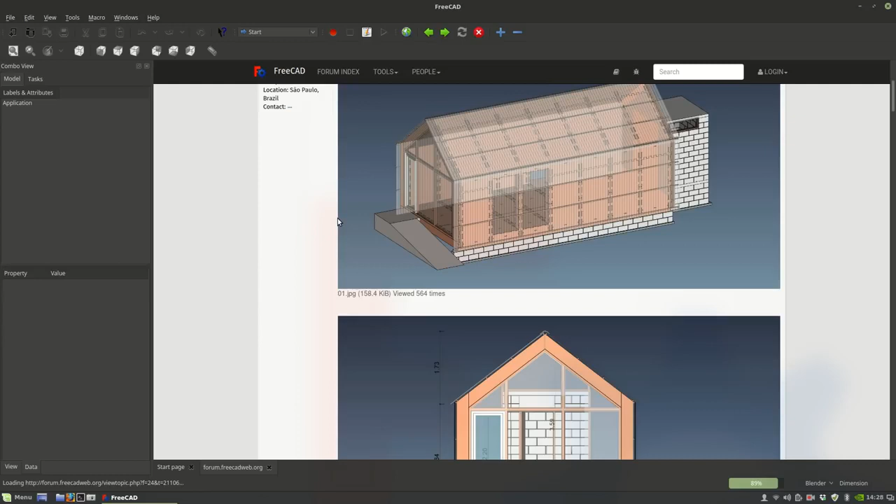For example, you can see all these new projects that Yorik has been working on, and you can actually engage in some kind of meaningful conversation with the community if you're a user. So it's very open and very accessible, and that's something I mostly enjoy about FreeCAD.

Anyways, you can go back and check those things out. The next thing I'd like to show you is that you can start your project if you had a previously saved project, or you have direct links to the tutorials, the FreeCAD homepage, and some example projects - this is an example project, the example architecture model.

This is basically a section cut and some elevations, one in wireframe mode and one in solid. So when you look closely, you can see the level of detail and the quality is there, and it does the job.

It does explain pretty much what's going on, and you can see the section here. It's pretty legible, pretty clean, as you can see. This is very basic, of course.

And then here you've got the model itself, which you can also observe and see how it was put together. So it's fairly good that it was made that way.

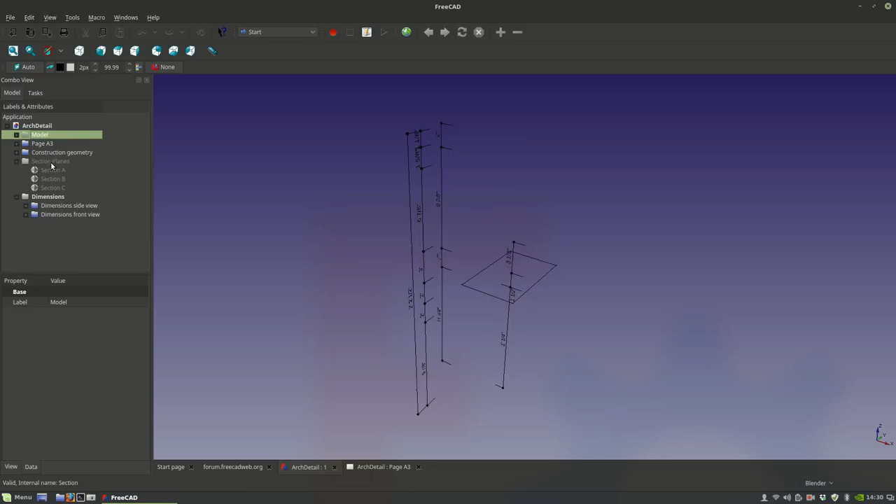And on the left here you've got the tree. So here you can see this is the folder where all the dimensions are. I can hide the dimensions like that, or hide the entire model if I want, or show the section planes, the section cuts that are cutting to provide these views.

So it's very organized. You can organize the drawing, and everything is simple and intuitive to work this way. So I'm just going to try to do a very basic demonstration at first, using some of these tools, just to see how it goes and how we can generate or create basic stuff in FreeCAD.

So I'm going to close this, and here I'm back in the start page. I'm going to start a new project by clicking on this button here. So you can see it started a new folder. Right now I have to select the workbench.

The four main workbenches that are probably going to be used the most would be the architecture workbench, primarily the one that would be used, and the draft workbench, which will also be used. Occasionally we can use the sketcher workbench - depending on the application, you can use it often or not, so it really depends. For this particular purpose we might not use it as much, and sometimes we might go into the part design workbench too. So those are the four main workbenches that could be used at any given time, but mostly we'll be hanging out in the architecture workbench.

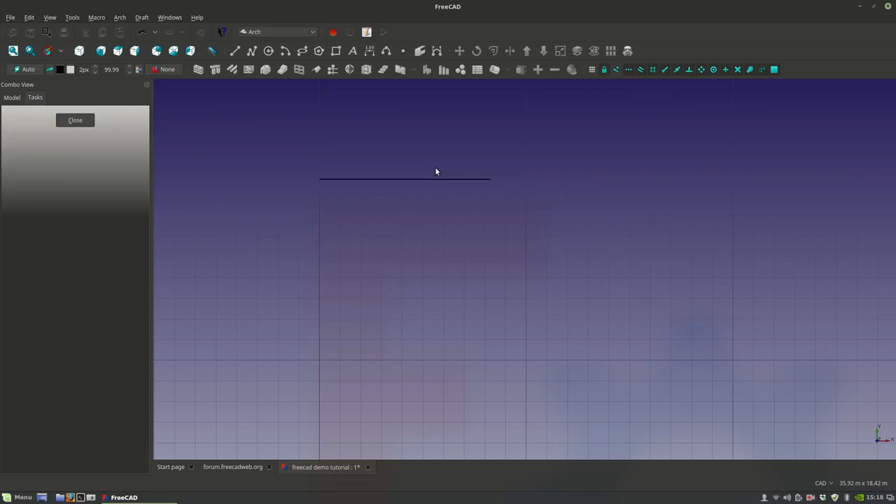I have this option here that says survey - start survey - and if I click on the line, it's going to tell me 8.19 meters. So that's one way I can figure it out. If I want to get out of that menu, I can double click outside of the object to deselect it, and then it's gonna go away.

So that's one way. Or the second way, I can select the line and come to the data property and see the length information here, 8.19. Equally, I can modify this length from here, from this menu.

I can say I want it to be 10 instead, and you can see it did update, so now I have a line that is 10 meters. That's very easy to control the length of any line anytime. So I select this line and I want it to be 20 meters, so I just enter 20 meters like this.

Each object that you draw has a name. So I'm gonna delete this one and look at it again. Here I can also control with every object the display mode, so I can go to point or wireframe—it's not gonna show us more because there's no difference between flat lines and wireframe for a line.

So I can tell it to be dashed or dotted, or dash dot, or change the line color. Or the line thickness, I can change that too. Like I said earlier, I like this option a lot, so I'm just gonna leave it to the default property where it was before.

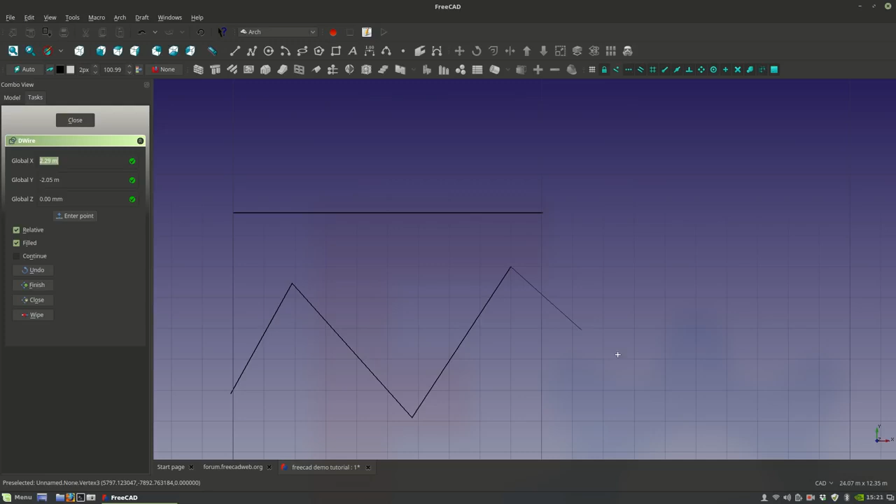The next thing I'm going to look at is the polyline—it's called the draft wire, or D-wire, in FreeCAD. I'm gonna click on it, and you can see I can click from one point to another, making a consistent connection of lines, and then click finish.

Here as well I have all the same controls, and more information as to how far I want to control this object. But what's particularly interesting about the D-wire is the chamfer size and the fillet radius. Let's look at the fillet radius—if I increase it...

Let's go to 0.1—you can see how it gave this a radius of 0.1 meters. I'm gonna go to 2, 5, and so on. You see how it gave everything a radius. That's the fillet radius, and it's very smooth. This allows us to create simple shapes with nice smooth rounded curves that are always parametric, because you can always increase that as needed. Pretty cool, I think.

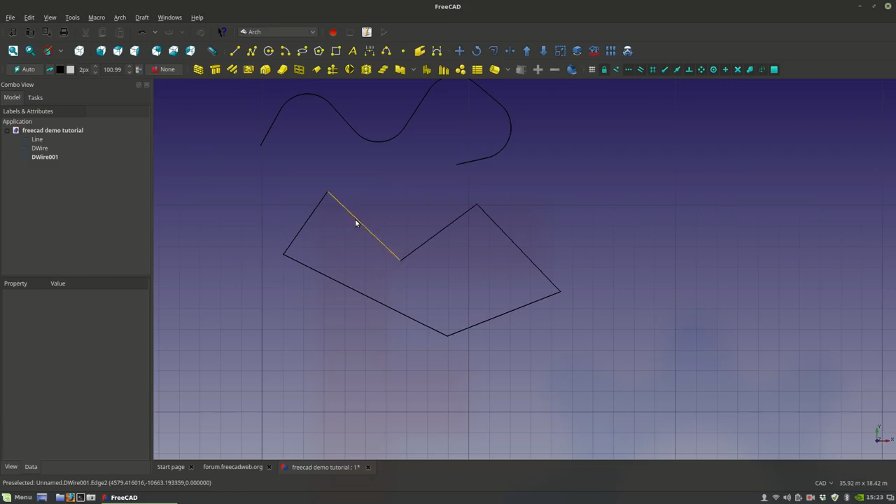The other thing is, if I draw another one as an example, I can close it like that. If I close it, it creates a face. And in that face, I can have it in two modes: make face mode true, or make face mode false, in which case it goes to the wire, giving me the ability to play with it as a wire instead.

And just like this other mode, you have the ability to control the fillet radius—you can see everything is being rounded. Alright, so it's looking good, like that. It's starting to look like a fancy table from the top view, you know. Pretty cool.

Then for face mode, I can control the opacity value. Under view there's the transparency setting, so I can set it maybe to 80, and you can see that it gives this kind of opacity feel to it. This is very good for designing plans and 2D furniture and stuff like that. And obviously you have the other options like the line—you can always control the length of the line at any time, and this is very perfect.

I want it to be 1.5 meters.

Okay, so there you go. It's perfect. Of course, you've got all the properties that you can play around with.

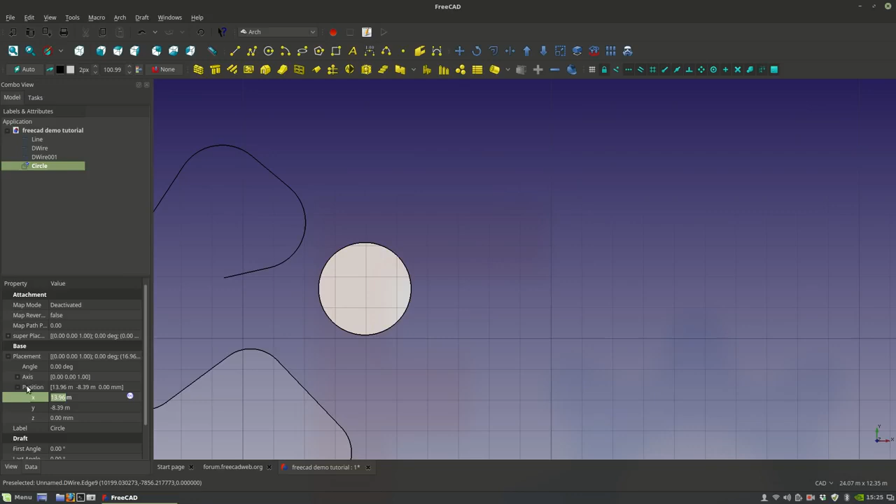Likewise, the axis controls the angle and the direction, the degree. I can tell you more about that later when we have a need to use it. Alright, so here's what I can tell it to be true or false, as you can see. Alright, true.

And of course, here we have the arc tool. So I'm going to draw a line, and then I'm going to start from here and draw like this. This is a tool that we use a lot to create doors with. You see, it's very perfect to create a door.

So if I want to create a door, I'm just going to draw one line like this, and then another line like this, and then I'm going to stretch this down with this tool, the trim, and then snap right here, and you can see that I already have a door. So I can try again on the other side like this, and then I click right here, or I go in this direction, and that's how I have my arc.

And likewise, this is very easy to control. You've got the radius property as well that you can always control.

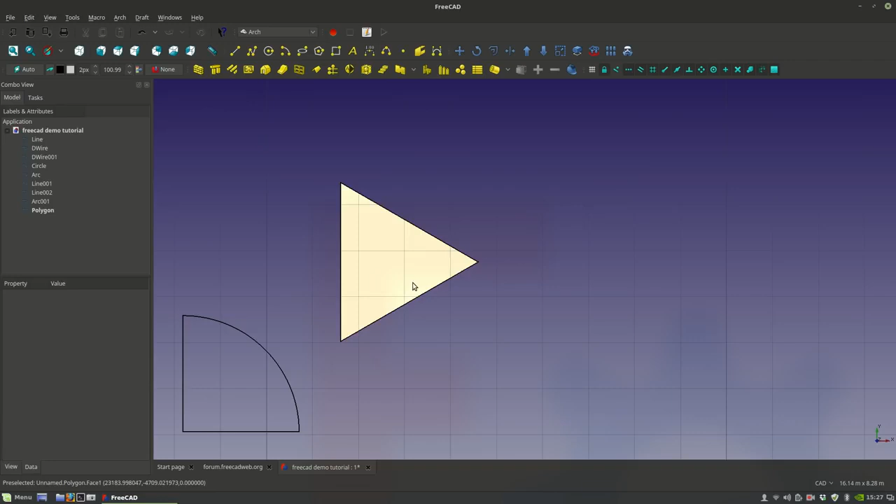And here you have the polygon. Right now it's set to 3, so it's a triangle. This is perfect for creating triangles. Or I can increase the number of faces at any time as well, and it gives me different geometric shapes that I want.

This is pretty cool, and I can control once again the size and more information.

Alright, and obviously we have the square. The square is amazing, and we will be using it all the time. It's straightforward, and also you can control it at any time. So here I just drew a box, and I didn't take care of making sure it snapped right. So I just select it again, and I make it 3 by 3.

And obviously if you take the survey tool, you can check the area by clicking on the face or the edges length. Okay, so there you go.

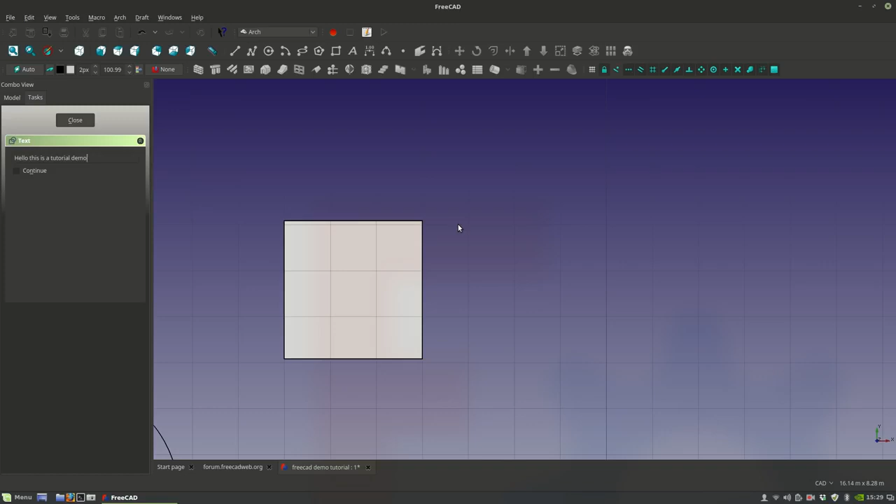Now then you have the text tool, annotation tool it's called. To use that, I just click in space, and then I enter what I want to enter: 'Hello, this is a tutorial demo.' Then I press enter one time and enter the second time, and it gets the text in. As you can see, I have the text that appeared there, and I'm going to select that text.

Come to the view and then increase the size with the font size. I can just scroll, and you can see how it's going to increase. Okay, and maybe I want to make it 200, right? I can make it right center or right justified. Some basic settings.

The line spacing if you had more lines, the rotation, the axis, and then the color as well. You can change the color if you want to, of course, just like any other thing in FreeCAD. And here you've got the font name. You can change the font. Maybe I want to work only with Ubuntu font like this, or I want to work with Arial like this.

So any font that is stored in your file system is going to be captured by this font name area. This is how you control the font. So this is looking good.

What else? And then you obviously have the dimension tool, this guy. Let's click on him. I want to dimension from this point to this point. So I'm going to click on that point, and I'm going to click on that point, and I'll drag my dimension, and there you go. I have a nice looking dimension there.

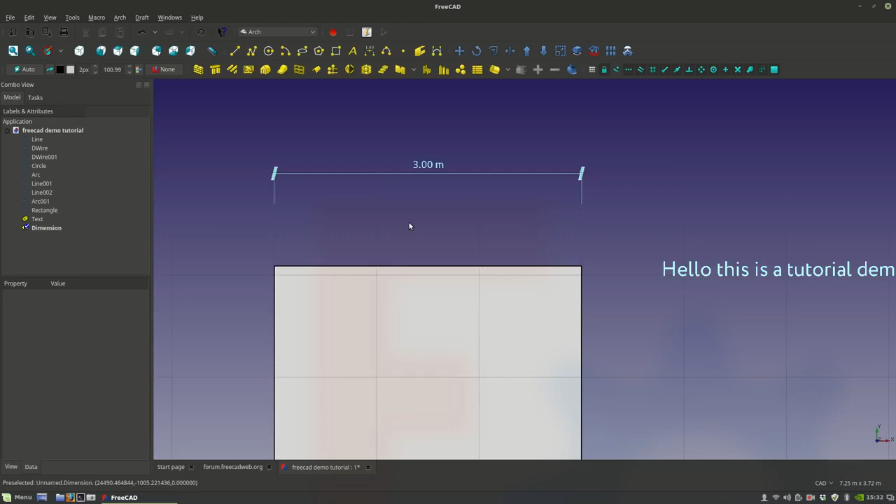I can tell it to show the unit or not show the unit in this particular case. And this is the offset value from the line to the edge. So some basic control, just like any other CAD program, you're going to have this basic control, and obviously the position and the distance and all the information you need to know. So that's that for those tools.

These other tools are not going to be used quite often, but there are occasional times where we're going to use them, and I'll tell you when I use them the most. But for this general purpose, this is already good enough for what we're trying to do. So I'm going to select all of that, hold and drag up, select all of it, right click, and delete, and I have a clean slate again. Alright, let me take a quick break and I'll be right back.

Alright, welcome back. For the next part of this adventure, I thought it would be interesting to start from a project that I am familiar with because I did it myself, and I can easily talk about it. So this is the kind of layout or result in terms of project that we will be trying to replicate.

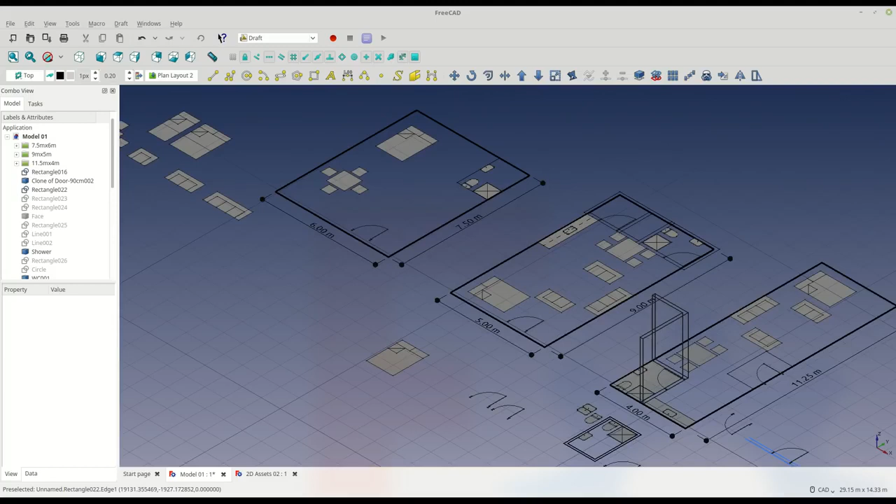And this is the trick about how we model in FreeCAD, understanding how to be efficient with it. Because when you're modeling in some of these 3D applications, it's very hard to understand how to make quick changes and figure out quick layouts and move fast. We all want to jump into the 3D and all that stuff, but usually you have to figure out the first basis for a lot of things, which is the floor plan. How does it work in the floor plan? Everything needs to first make sense floor plan wise before you can start to talk about the 3D.

This was a challenge in a way because I had never really created this kind of workflow before, so this was the first time for me to do something like this. It's very easy to work with a program like Revit or some of these currently existing programs, because you can just drag the walls, and AutoCAD has all these features where you can trim and move things up and down. In Revit, you can just drag the walls and play with the dimensions, but in FreeCAD it's a whole different way of thinking. Trying to understand how to play around with it was quite a challenge, and I think this was a good project.

So right now I'm just swiping through to show you a little bit how I figured out the layout, and I'm going to take you into the process of building this kind of stuff. It's not anything complicated, it's just understanding what you're trying to do and knowing how to do it.

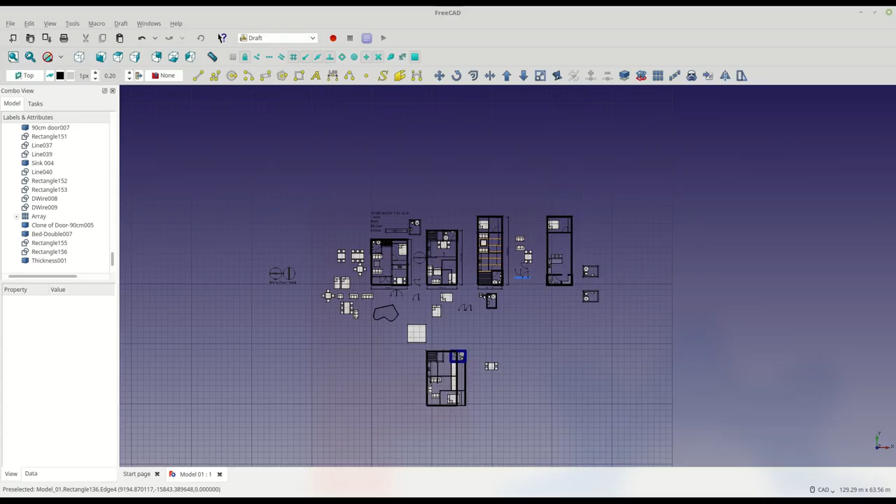So I'm just going to quickly swipe through, and sometimes I like to take pictures of what it looks like. It has this artistic appeal to it. Some of the line weights look very interesting when you look at it from afar. It has its own language, its own feel, and there's something very good about FreeCAD. It has its own identity. It doesn't try to look like the other programs.

So this is when I had figured out one potential working floor plan already. I'll kind of get down to it and explain to you.

So I'm trying to figure out the second floor plan, and everything looks messy. You see, I'm trying to figure out things, trying to build out this area, trying to understand how it works, trying to break down a few things, understanding the sense of what you're trying to create in FreeCAD, and then hitting your head against the wall until you get some kind of workflow that allows you to generate a consistent way of thinking. Eventually it starts to make more sense. You begin to have interesting shapes come out and reveal itself, and you can work with that.

Okay, so we're going to try to see how we can get to this kind of result, this kind of floor plan layout, so this kind of way of working in 2D.

All right, I thought that this was interesting. Looks like a face—this is the guy's chin and all that. This kind of futuristic, abstract, humanoid face. Anyways, so...

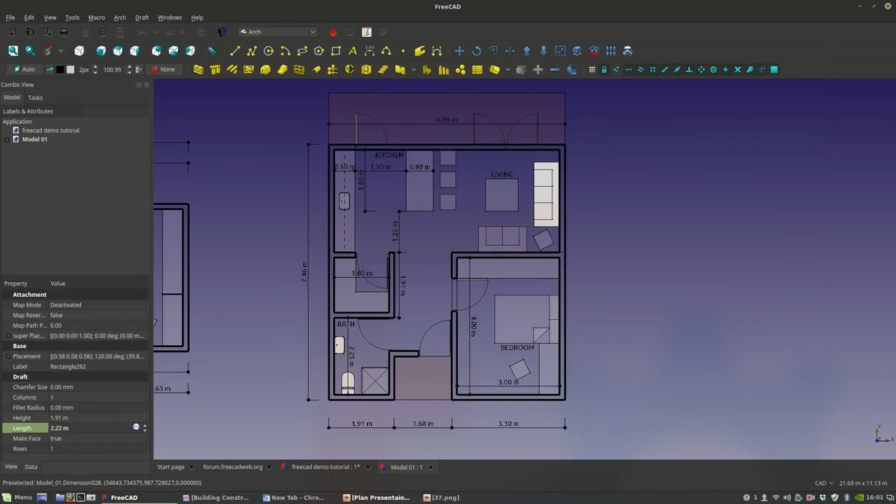So let's hypothetically say that you wanted to work with a 45 square meter space, and you had, let's say, a one bed, one living, one kitchen, one bath requirement to fit in that tiny space, and you were to start with some confined spaces. If you were to start with a confined space, what would it look like? And you have no idea what it would look like.

So the first thing you would do is you get into FreeCAD and draw the space itself. So I'm going to draw a box—this is my box, this is the basic box, the rectangle. Here I have the dimensions of the rectangle. And 45 square meters is, obviously, 6 meters by 7.5 meters. So I'm going to take my box and type the height, 6 meters by 7.5 meters. So this is my box right here, this is the size of just one of the sizes I'm working with. This is how I know what I have as a space to work with.

Okay, now I'm going to tell it to make face false, because I just want to see the guidelines. I just want to see the internal space, 45 square meters internally.

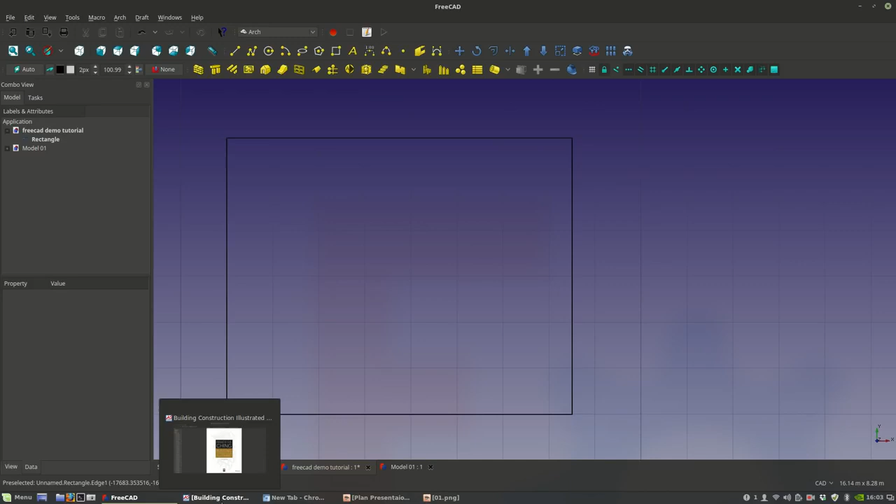Okay, so the next thing I want to do is get an idea of some of what I'll call assets, objects, a few things. For example, I want to know what my corridor width is, things like that. So a good example would be where I'm going to refer to D.K. Ching, where I'm going to look for the door width, or a corridor, the dimensions of a human being. Architects already know these things—I already know it, but I want to show you how you can get to this kind of information, how you can figure out something good to work with if you have no idea what you're working with. So instead of coming here, I'm going to go to the website and type in human dimensions.

I'm going to go to image and look at a few things here that tell me the dimensions, assuming they're more or less accurate for what I'm trying to do. This is why I use this book, but not everyone has the notion of using that book. So we have to find some good information, something that gives you information on height, length, width, sizes. I'm going to look for it and get back to you.

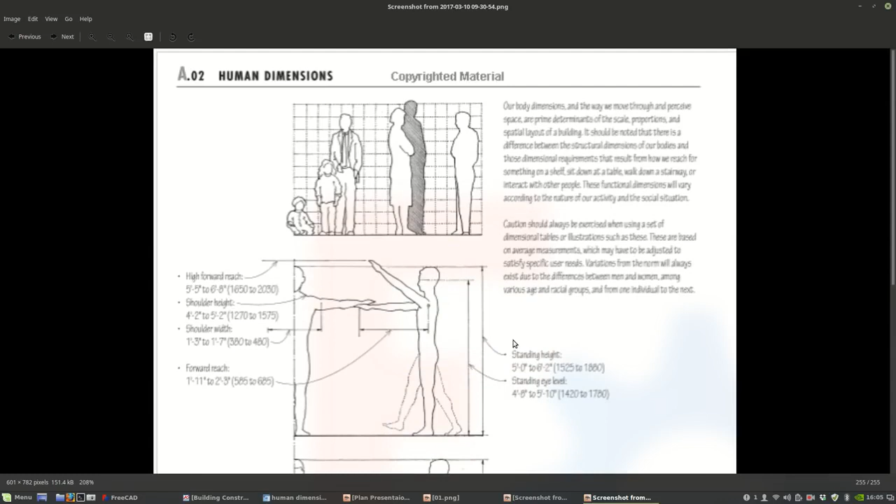So I brought up the picture of what we're looking for in the book, D.K. Ching. This is a bit what we're looking for, human dimensions, and this gives us an idea, though it's a bit blurry. Let me...

Okay, we're gonna use the picture I found. A human dimension is 5 feet by 6.5 inches max, or 1.5 meters by 1.8 meters approximately. So we can say that a sensible height will be 2 meters, since we work in meters, or a general standard height of walls these days is 3 meters.

And then you want to know things like this: if a human is standing sideways, they're 2 feet 2 inches of minimal space needed for comfort, or if standing frontwise, it's 3 feet 10 inches, or 1.17 meters.

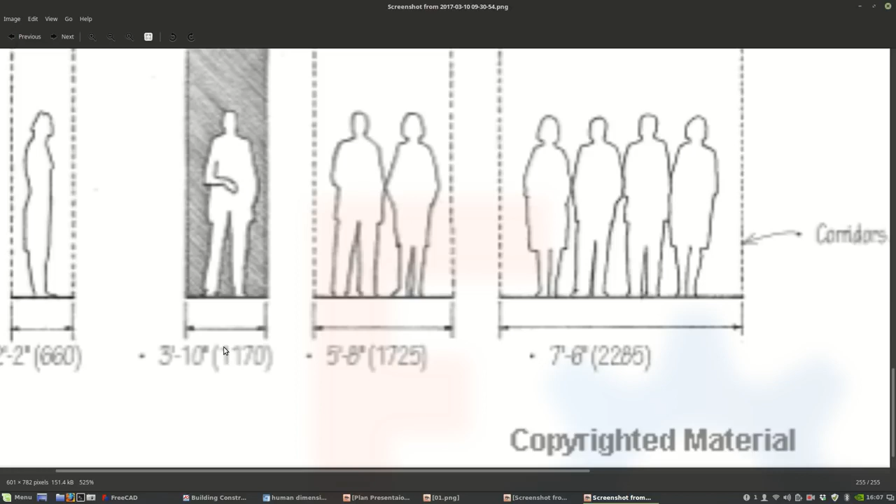So this is why the standard for corridors in the US is 4 feet. Anything less than 4 feet sometimes does not meet code requirements for corridors. In meters, that's 1.2 meters. We want to take that reference into account when working in FreeCAD.

So we want a box that's going to be, let's say, 1.2 meters wide by 1.2 meters. That's gonna help guide us with whatever relates to the corridor space we need in terms of circulation.

And then what else? This just tells you what 2 people look like, and 3 people, and what sitting looks like, seats look like. Here you'll also have some seating position dimensions, like 39 inches, so 0.99 meters, by 80 to 84 inches for the height.

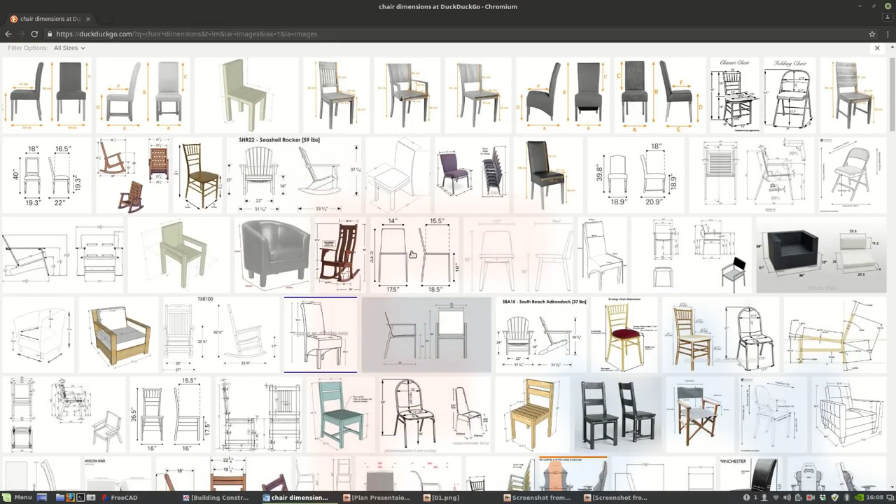So this gives you some general basic plan dimensions you can work with that are already standard. If you want to find those, you can just type in chair dimensions, and you can say, well, I want to know what the dimensions of a chair are. We want to look for it in meters because this is in inches.

Let's look for a good one. This is a sofa, 56 centimeters by 56 centimeters for this little stool, and for the chair itself it's 40 centimeters by 77 centimeters. All right, so now we know that.

So I'm just gonna take this box and duplicate it. I'm gonna check move and then copy, and move one copy to the side, and this is going to be my chair. So I'm going to make it 40 centimeters by 77. I'm gonna type in 40 cm.

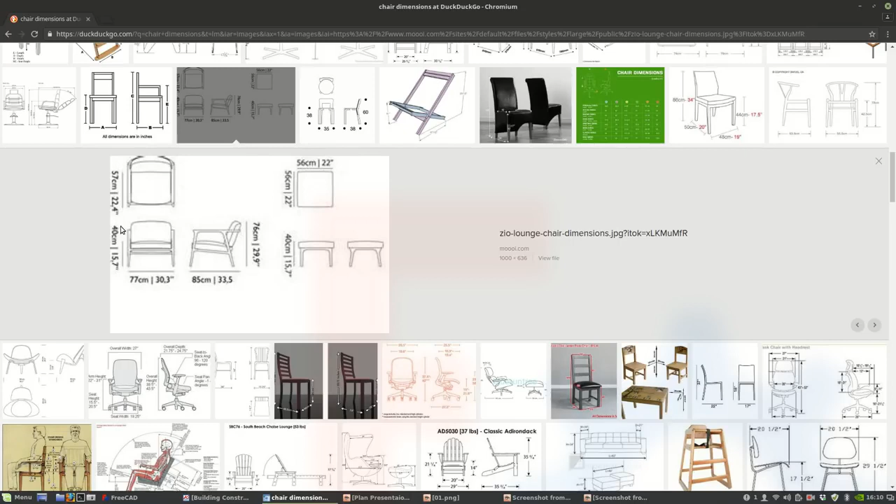And I'm gonna type in 77 cm, like so. Looks like a very interesting tiny chair. So what was the other one? The stool itself. Well, that chair doesn't make quite sense, it's a bit tiny in a way, 77 centimeters by 40 centimeters. That's too small. I want a better looking chair in terms of dimensions.

Well, I'm just going to go with this picture, it's gonna be easier since I already have it. So for the sofa, I have for an armchair, 0.565 meters. So I'm gonna type in here 565 and 56. Okay, that looks good, that's my chair. And the next thing is...

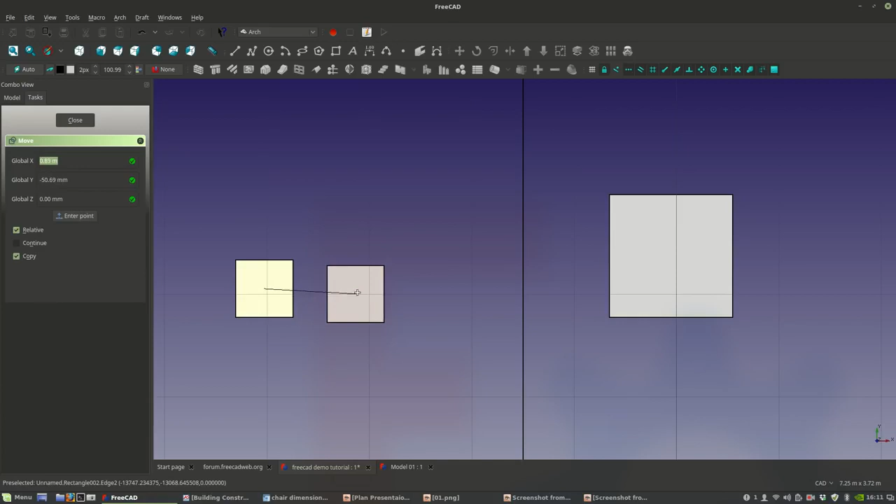Maybe I want to draw this. I'm gonna draw a box, 48, or maybe I want to make it 1.2 meters, right? So I'm gonna take that and duplicate it, copy it, and in this one I'm gonna make it 1.2 meters. He says the max is 2.845, so let's actually try 2.8. All right, oops, that's not right.

Well, I guess that's right, but we're going to go for a smaller dimension. So this is my armchair dimension, it's 0.585. Okay, so I have my 0.585 here, 0.58, like that.

Alright, so we're going to draw the 2D representation. It has this very tiny edge to it. So I'm going to come into FreeCAD, take this line, make it false in terms of face, then select the line again and take the offset tool, and offset it by something that looks approximately accurate.

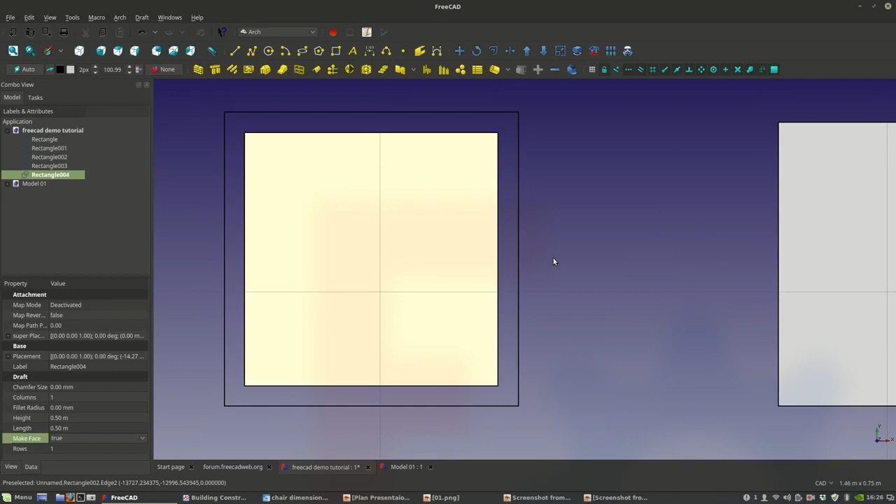So I'm going to take that guy again and make it false as well, so I can see what's going on. So I'm going to take the polyline tool, like this, and click right here, right here, and so on all the edges.

And then here I'm going to snap onto the extension, but I'm going to turn off... well, I'm going to click here, then click here, click here, and then click here. Then here I can take this and go back - I can either double click here and it opens the menu where I can grab this and snap it right there and finish that, and there you go.

And then what else are we missing? Probably 2 lines towards the back, and I can just draw a box, maybe start from here and snap it right there. Take that box and I can see that the height of it is 50, and the width and length is 25, so I want it to be 10.

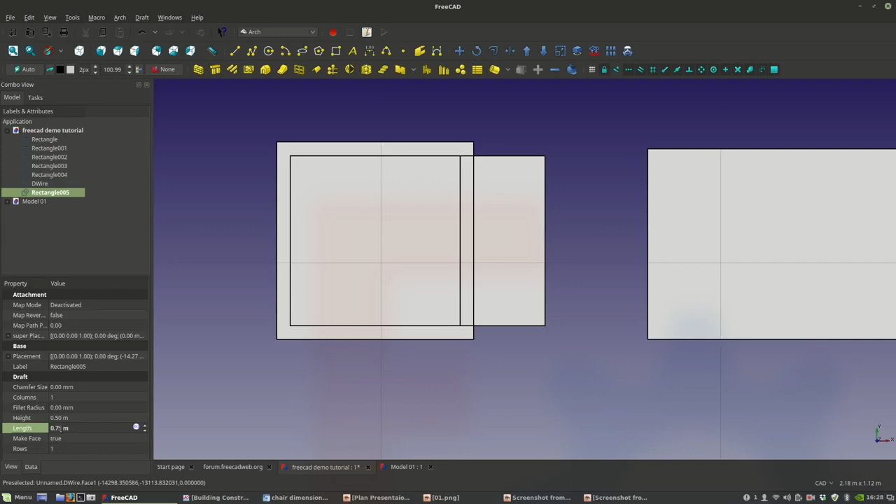And well, maybe I want to make it a little bit smaller than that, maybe 75. Okay, hold on, just delete that. Snap right there. Then I'm going to take this guy and 07. Okay.

And so I'm going to copy that, copy like this. Alright, and lastly I'm going to probably draw a line here like this, or yeah, and then I'm going to take another box and do this.

Okay, so now I can delete that line, and now these two rectangles that I initially started with, I can just move them on the side. I don't want to copy, so I uncheck this and grab them from anywhere and just move them onto the side like so. And so now I have all the shapes that constitute the sofa that we just saw there.

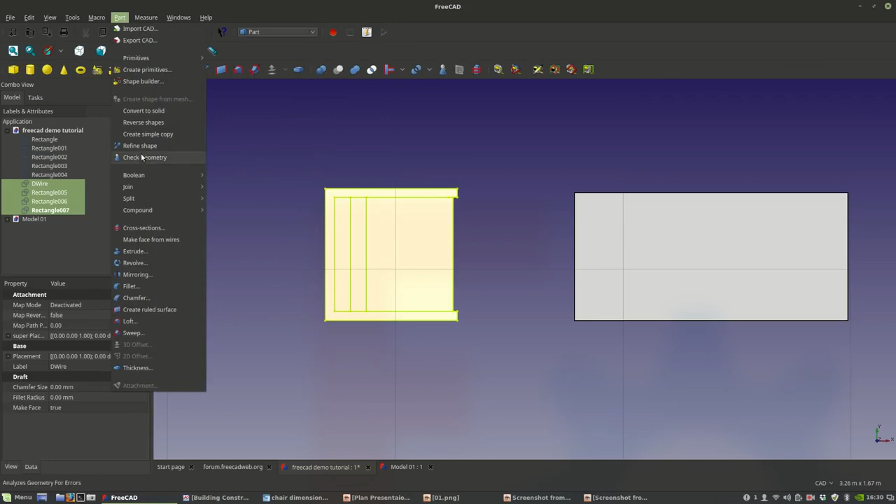So now what I'm going to do is select all of them like this, select all, and go to the part design, come to the part, and create a compound, make a compound. So now I have one object. You can see that object has a tree now which relates to all of them, and I can rename that compound - I will rename it armchair, armchair, like this.

And so if I were to make a copy of it, I'm going to go back to the architecture workbench and make a copy of it - right click here, and then copy. So the second armchair loses all of the link that the first one had, so now I can move this independently. So now I'm going to select this one and also come to the transparency value and make it 80. And so this is how I have my furniture. I can also select it and come here and change the line width, make it 1, and this is how I have my furniture.

Okay, so that's for my furniture. I can make a copy of him again and move him around here as one of my objects. Now I want to create the sofa, maybe a 3-seat sofa. So to create a 3 sofa, I'm going to base myself from one of these sketches again.

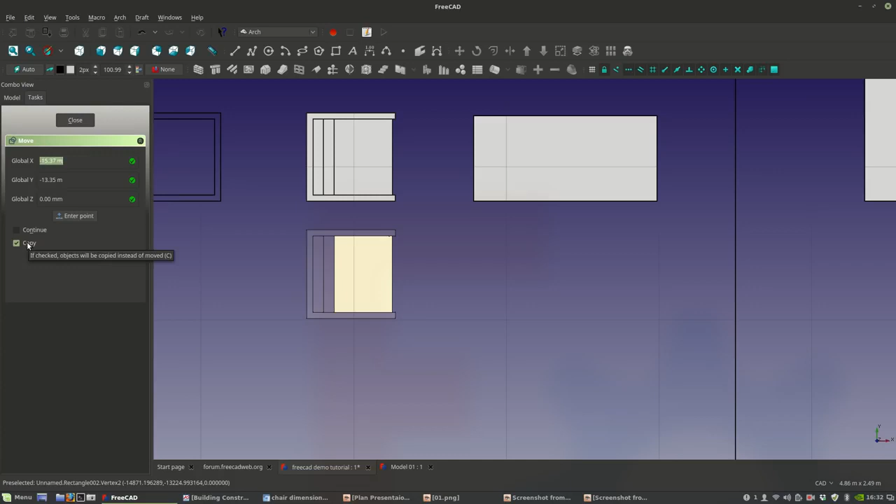So I want all these internal dimensions to be the same. So what I'm going to simply do is select this and move it, copy - or maybe not. I'm going to select this edge and then snap it at this other internal edge, so that it gives me this internal space divided by one line in the middle, and then this internal space. And then I'm going to do the same thing and make another copy, this time copy, so I'm going to snap from here to right here.

Alright, I'm going to take this line, get in there, and hide these others. I'm pressing space bar to show them. I'm going to select this one, double click on it, and drag this line and stretch it, as you see, like this.

Right now I'm trying to snap on this edge, but it's not snapping there, so I'm going to turn off a few snaps that are probably responsible for that. I have this extension that keeps popping up, I don't want it to show. I have this equal thing, don't want it either. And then this perpendicular - or is it the plus? This is the ortho, I don't want it to show up.

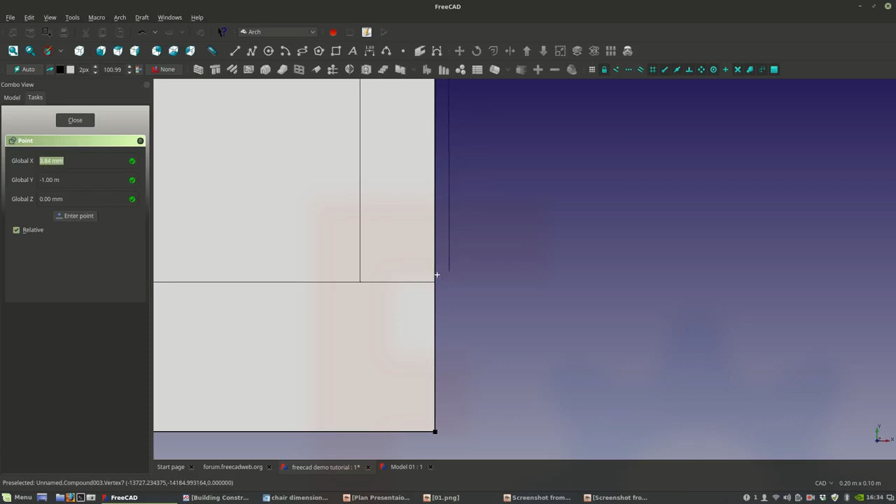Probably it's not snapping because this line is a face, so I'm going to change it to wire, make face false. Alright, so now it's probably going to be much easier to snap.

So I'm going to double click on it again, select that and snap it there like this, and then select that and snap it there like that. Okay, and then finish. I can make it a face again, true.

Alright, so these internal objects, I can hide them for now and then bring back the hidden objects later. This one I can double click, or maybe before that I want to create the dividers. So I'm going to select the line tool, click on this edge and then another edge, and draw that line.

I can hide this so you can see the line, and take this line and make a copy of it. Click here, copy, and then click from this edge onto this other line, so I have a nice division of 3. Now I can bring back these other objects.

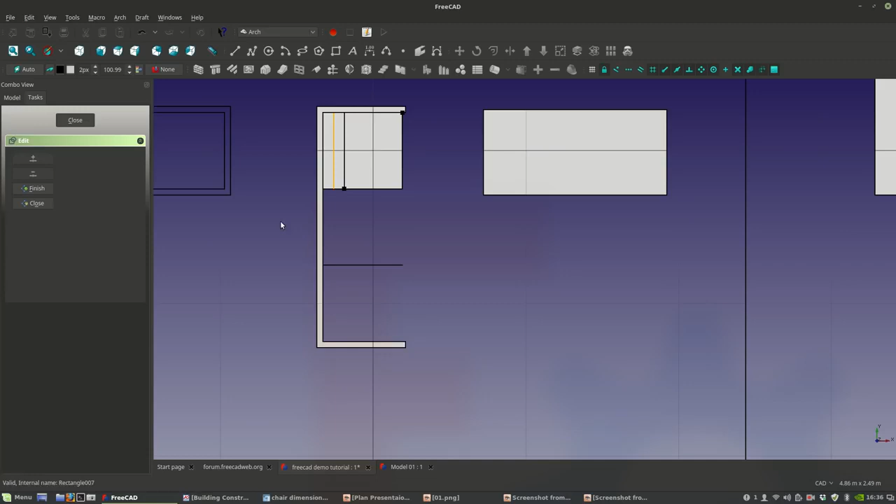I can double click on here, now take my box and stretch it all the way down like this, and it moves the upper end. I take the upper end and stretch it back till it snaps there again, like so, and then I say finish.

I do the same thing for this one - modify it, just stretch it down like so, and then like so, and finish. Then this one, do the same thing, like so and like so. Okay, so there you have it.

I have my armchair, so now I can turn these sub objects off like this, and turn on this object because it updated the armchair.

What I'm going to do now is make a copy of this armchair and call it something else. So I'm going to select this armchair and then select the two lines that I drew along with it, this line and this line, and then make a copy.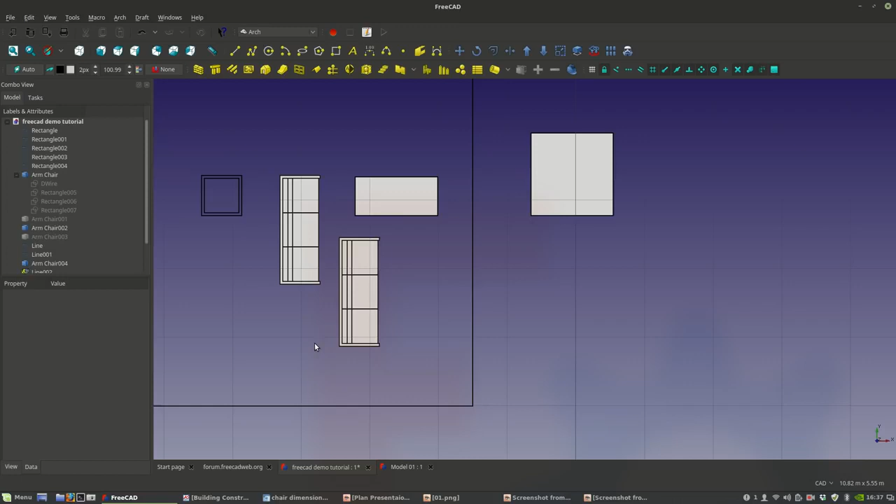Alright, so now the armchair is one unit. So what I want to do is rename it. Well, what I want to do first is combine all of them into one object like this.

I'm going to go back to the part workbench and make a compound. Okay, so I have a compound now, and I just want to break the link of that compound so I have one object. So I'm going to first rename the compound object. I'm going to rename it sofa, like that.

Okay, and then I'm going to copy that onto the side again one more time, and here I have a nice clean sofa that is just one object. I can also change the transparency to 80% and probably the line width to 1, and there you have it.

I can move that sofa right next to it, and this time I don't want to copy it. So now I have a sofa. I can get rid of all of these other objects that I used to draw, just edit box selection... undo that.

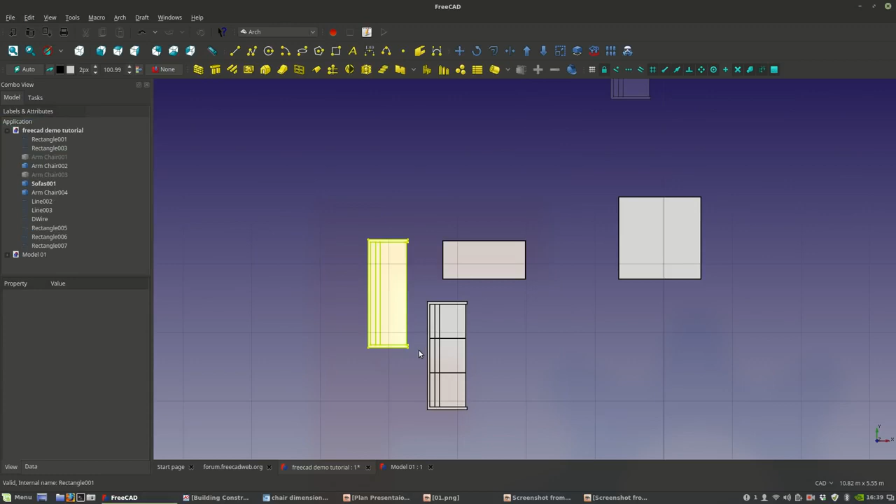Delete, delete, delete, and delete that. Okay, so you see how we've created a nice object.

It's called sofa here. We can rename it again. Okay, sofa, and this is going to be armchair. We seem to have another armchair there and another one here, so we want to delete those two as well.

Alright, so now we have a nice armchair that we can start to use, and we can save this and always reuse it all the time. So this is an asset that you can always reuse. So that's it, I'm gonna take a short break real quick.

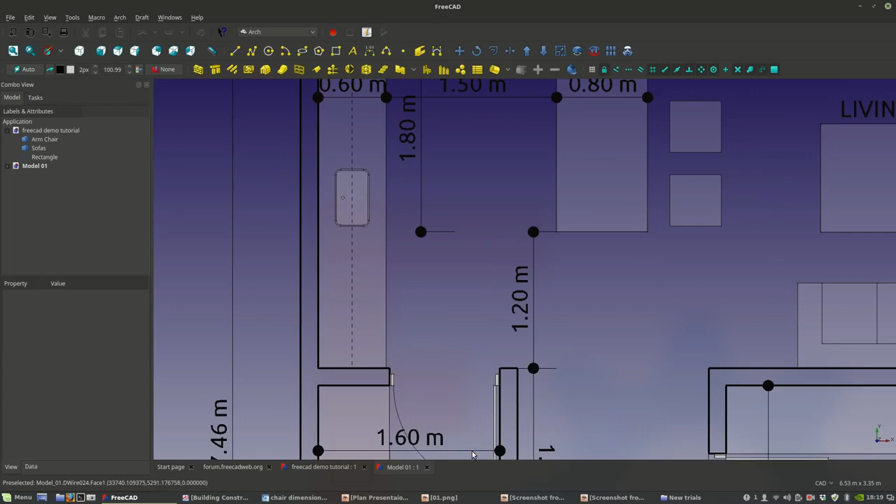This should be fairly easy now that we have a general idea of how to model some of these things. So maybe I'm going to start with the sink. I want to get some general dimensions of what the sink is all about. So let me just try to type in kitchen sink dimensions and see what comes up.

Okay, so I have a few things here, but once again I'm going to look for something with millimeter values, and this one is not so crazy important because the dimensions vary by manufacturer and also by designer. So you want to get something that's just general for now.

This one looked like a pretty good one, hold on, this one for example. Okay, this one looks like a very good one that we could go by. So let's just analyze the shape a little bit. We have here a dimension of 1.12 meters by about 0.51 meters. So let's do that real quick.

So let's go back into our drawing and draw another box again, a very small one. Okay, and let's go to the data, and here we have the length 1.12 and 0.51. Okay, so that's it right there.

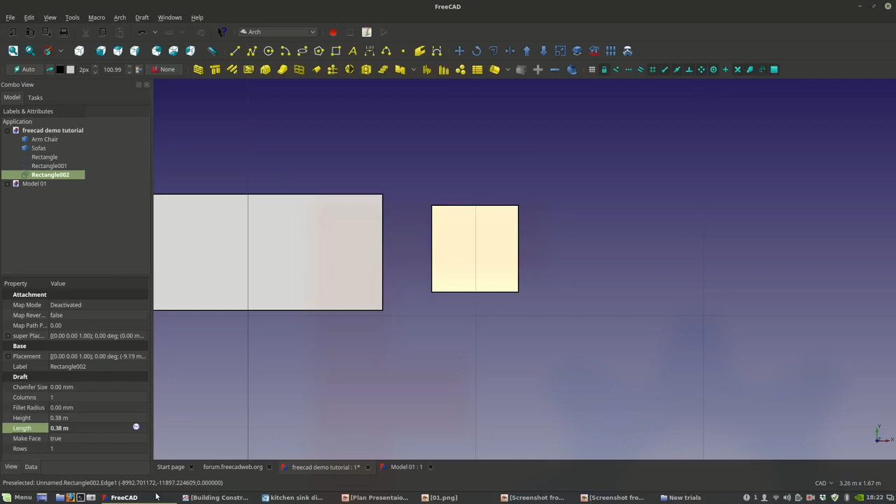And then this other one is 300 by 380. Okay, so I'm gonna take this one and duplicate it on the side like this. Take that and copy, check copy, and move that on the side. Take this one, and on the length I want it to be maybe 300. So take that off, maybe not that one. 8 here and 0 here. So there we go.

Okay, and then what else? I think that's about it. And it's this little dimension in the offset, we can just be arbitrary for that one.

So now maybe we want to align that with the center. So I'm going to take my line tool and snap at the center and draw a small line there, and then take this guy and grab him at the center and snap him there as well. I still have the copy command, that's why I copied that, so I'm going to delete the previous copy.

And then so what I'm going to do now is create the offset value from the edge. So let's see, I'm going to try something here.

I'm going to maybe copy this and snap it right there. Take this guy, probably make face false, this guy as well, false, and then take this guy and offset him a certain value. Okay, that seems to work just fine, and I didn't get the copy tool, so offset and copy right here. Alright, looks good.

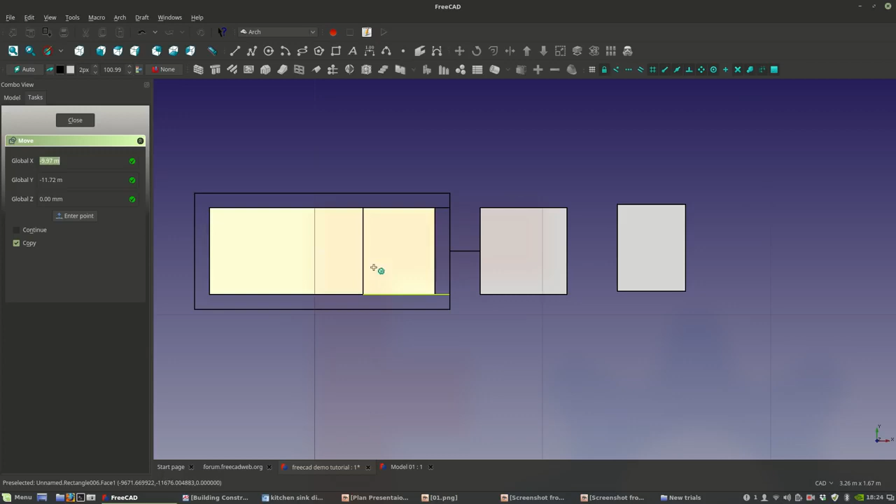So now I can just take this guy and move him once again, undo the copy, and just move him onto the side here like this, and there you go. So I can use this spatial configuration, this space as a standard, so I can just grab a box tool and draw a box there, and then take this box and move him right here, and then take this guy and move him right at the edge of this box.

Okay, so it doesn't snap because this guy's in make face true, so I'm gonna make him false, and take this guy again and move him like this, and like that. So there you go, and make him false. There you go. And so now I can delete this guy. He's not useful, or maybe he could be useful again. Just gonna keep him for now. I don't need this guy anymore.

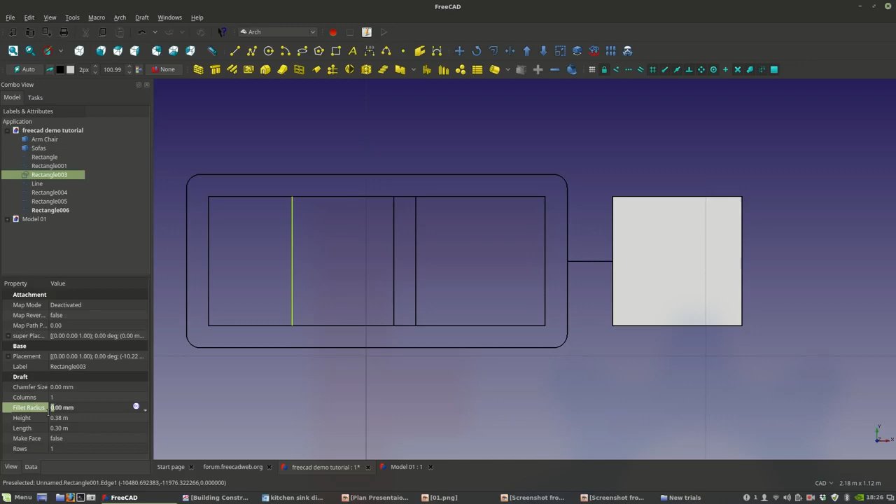Now what else? You can see that it's got some few rounded corners as well. So what we can do about that is select this and then fillet radius. I'm going to tell it to be probably, let's try 10. It's pretty small. I'm going to do 20, maybe 40. Okay, this looks good. And this guy as well, probably go to 20, 40 as well, 40, and this guy as well, 40 millimeters. So just add a 4 there, and everything looks good.

Press this and hide that, and I'm starting to have something decent.

Okay, so now what I want to do is just simply draw a circle. Can bring this guy back, take this tool, maybe draw a circle right here, give it a specific radius. Maybe I want it to be 30 or 20 milli, like so. Okay, so I'm going to take a line and draw a line right here, and then take this small circle and move him from here and snap him to the middle there. Is it looking good enough? Yeah, it's gonna do the job.

And then what I can do next is mirror that circle, or I can just copy the same thing, select both of them, hit copy, and snap it from here to here. So now I have a sink, something that looks like a sink.

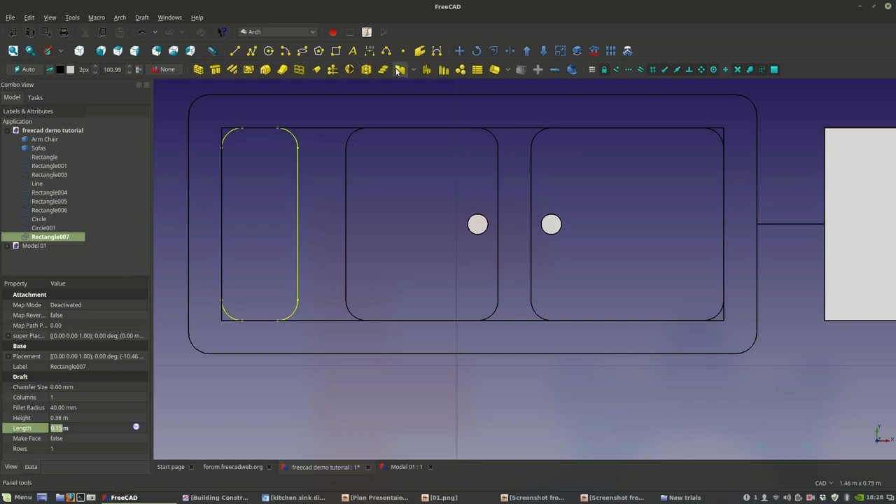And so another one last thing that I could potentially do is probably copy this guy right here, like so. Okay, and then make him a little bit thinner, probably let's say 20 here, or maybe 15, I guess. Alright, and so I'm gonna move him by just a few, by about this distance.

Okay, whatever, looks good. So I'm going to remove the radius that it has, and make face true, and shrink its size, probably maybe 20, like this, and also center it as well, like that, and then take that, grab him from the middle, and move him to the middle, and then I can delete this line.

And so what I want to do with this, I want to come right here, which is columns. I want to add a column, probably not the column, sorry, rows. I want to add a few rows like this. It's starting to look good. Another maybe 10. Okay, 10 is good enough.

So now let's see what that looks like right here. It's just a bunch of lines. Maybe if I made face false, what do we have here? And if I delete this, what do we have? It's decent. Honestly, personally, I prefer the sink without this, but it's whatever for now.

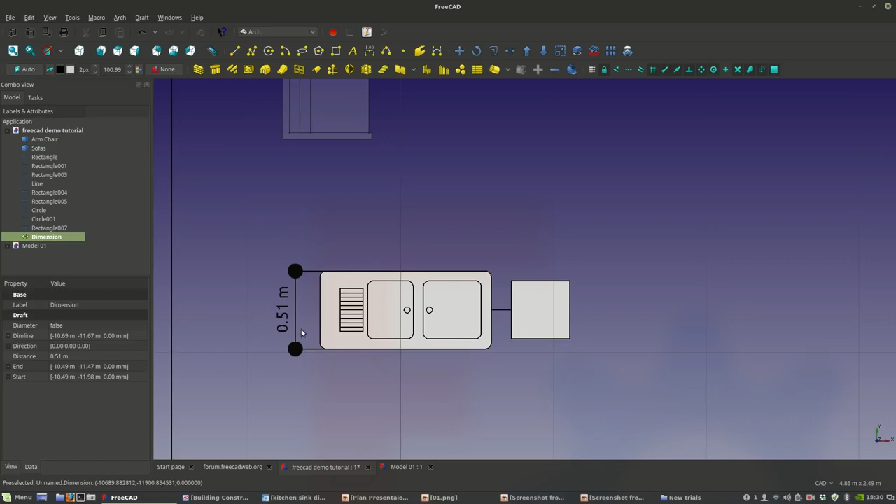Let's look at the dimensions. 0.51. It's good. It's looking good. Okay, so I'm gonna delete that.

Delete this. Delete this. And honestly, I don't like this. I'm gonna delete that. And I'm gonna bring back the sink. Right now, okay, so right now.

Okay, so right now all these objects, pressing shift I can select all of them. Right now I can leave the drawing as it is right now. It's very simple, it's basic. I can leave it the way it is. I can just come here and change the transparency value where I have 80 here, and this is what you could be looking at. So what's going on here? 80 as well, 80 as well, and 80.

Okay, so there you go. I can leave it like this and it's gonna do the job for what we're trying to do, or I can break it down further where instead of having a combination of objects, I can just dissect this some more. Let me show you what I mean. Let me select all this and then take this and move a copy onto the side.

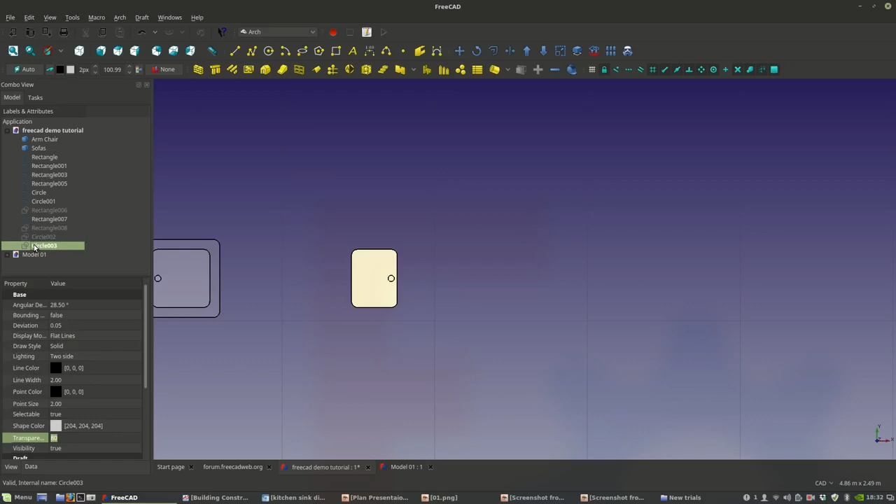I can make a hole. So I'm gonna select this guy and this guy, and then grab this tool, and I'm gonna make a hole. So right there I have made a hole for that object, right? So I can always update that.

Now I'm gonna bring the other guy in. I'm gonna do the same thing. Select the larger face, and then select the smaller face, and then use the downgrade command, and it's gonna create the hole. So I have that. Now I have the bigger circle.

So the bigger circle is the bigger rectangle. I can cut the same thing through. So I'm going to bring him out, and then I'm going to select this face. Well, I'm going to select the, wait, which way comes first? Let's try. I'm gonna select this and then that and then drop that. Okay, so that's what it created. It looks funky.

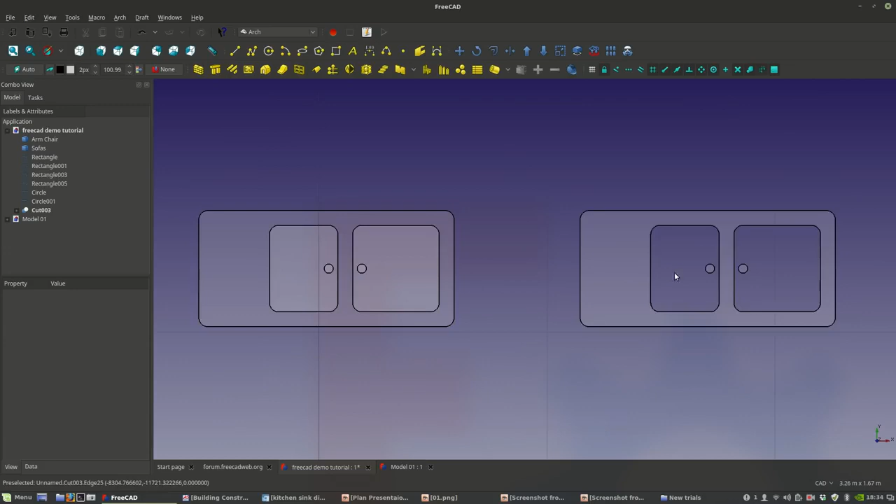Okay, and then I'm gonna select this guy and then this guy and do that, and so there you go. That's what I meant when I said I can either break it down some more and have this simple shape with this feel to it, rather than have all of these objects. So it really depends on how you want to work with these things.

So now you can see I have one object there, and this is the one that retains all the links. So this is the one you can always modify. So it really depends, but honestly, I do prefer this one quite a lot.

So for this one, what I'm gonna instead do, since they're all broken down like this, I am going to go to our familiar Part workbench and go to Make Compound, and I'm gonna make a compound, and so now I have a nice compound right there.

And this compound as well, if I want it to be one object, I can just select the compound and copy him as well. I don't know why I'm selecting just that, and then copy, and it's selecting my, not sure why it's selecting this box. Hold on. Oh, this box is included in the compound, so I'm gonna delete this compound, and I'm gonna break them out.

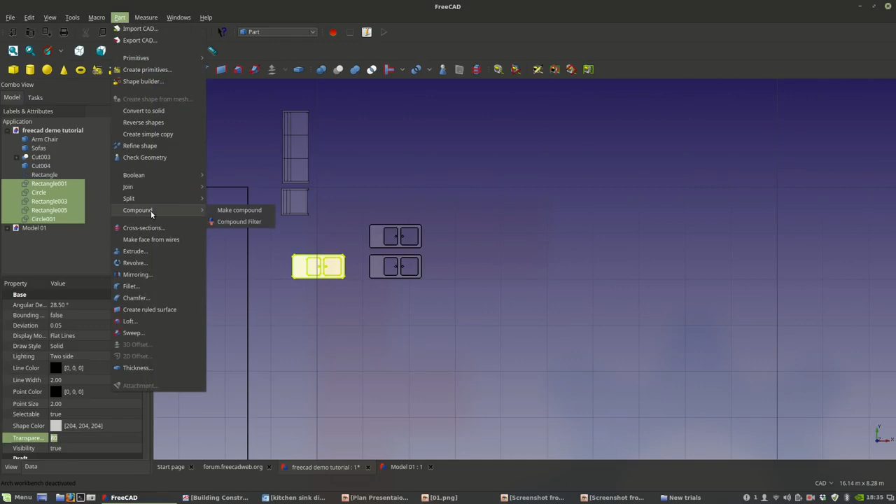And I'm just gonna select all of this and go back to the Part workbench, Compound, Make Compound, and I have a nice compound, and I can break the compound into a simple object by just making a copy of it. And there you go, just like this one, I have a nice compound just like that one. So it really depends on what you want to do.

So, well, maybe I don't want too many objects, so I'm just gonna delete the ones that have retained the processes. I'm gonna select that and select that, delete, and then select these guys. I'm gonna open the tree view because all of the objects need to be deleted, and delete. Nice, and so now I'm left with simple objects.

So now I can simply rename this one sink, and I guess sink here as well. Sink, rename right here. Rename sink 2. Okay, so there you go, we got our sink. And then change the line width down a bit. Good, it's looking good, it's looking good.

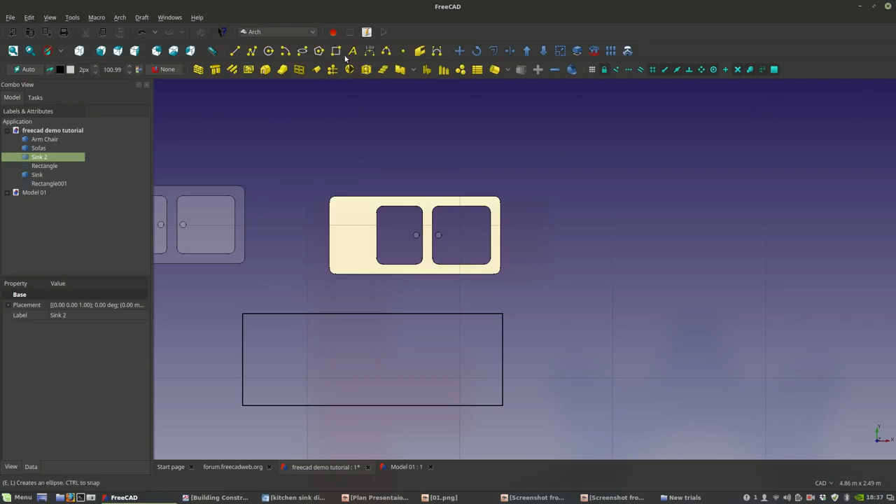So that makes our good kitchen countertop, and I'm going to make it false for the face, and then I'm gonna grab this guy and just maybe move him inside so it just looks like it belongs somewhere, and probably move him to the middle like this.

Alright, that looks good. Delete that, and make this one true, and I'm going to give it a transparent value of 80 as well. There you go, with a line width of 1. So for the countertops as well, I'm going to do the same thing. I'll take this one, copy it, and paste it.

Same thing, but here I'm just going to change the thickness to 30 like this. So there you go, and I want to move it to the top.

Hold on, make face false. Okay, make face false, take this guy and move him to the top like this, and then I want to give him a dashed line, draw style dashed. Okay, so it looks good.

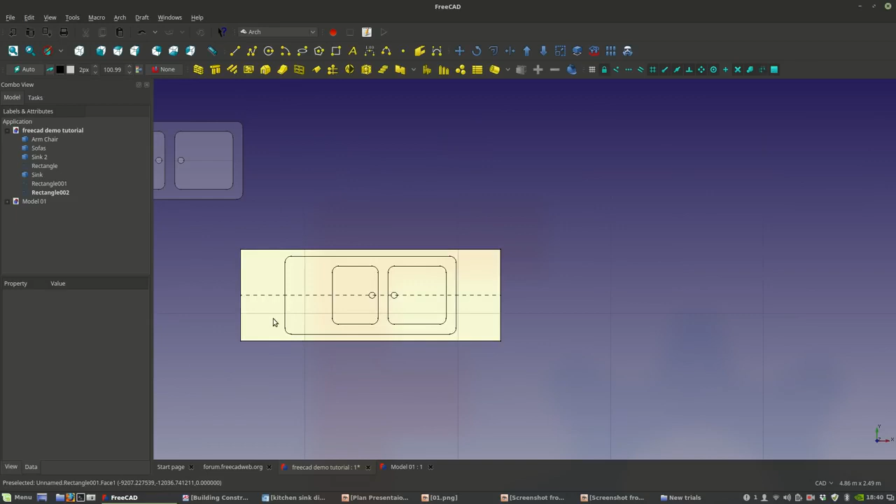So now I have a good representation of a kitchen, and this allows me to always modify it when I want. I can just click there, double click, and change the length of the countertop depending on what I want to do. So that's good already, we've got our kitchen.

Bring him back. I'm missing a snapping option here for some reason. This guy's in wireframe, but still make face false. Okay, let's try this one more time. I'm missing a snapping option here. Or I can just draw another box.

Interesting, so this is something I'm noticing with FreeCAD, is that we don't yet have an option to tell it which object is above another object, or maybe we do and I am not familiar with it, because it doesn't recognize when an object is above another one. So if there's an object above this one, and I'm trying to snap an object I'm drawing on top of this surface, it's not going to be able to read that against an object here. So maybe that's something we can fix.

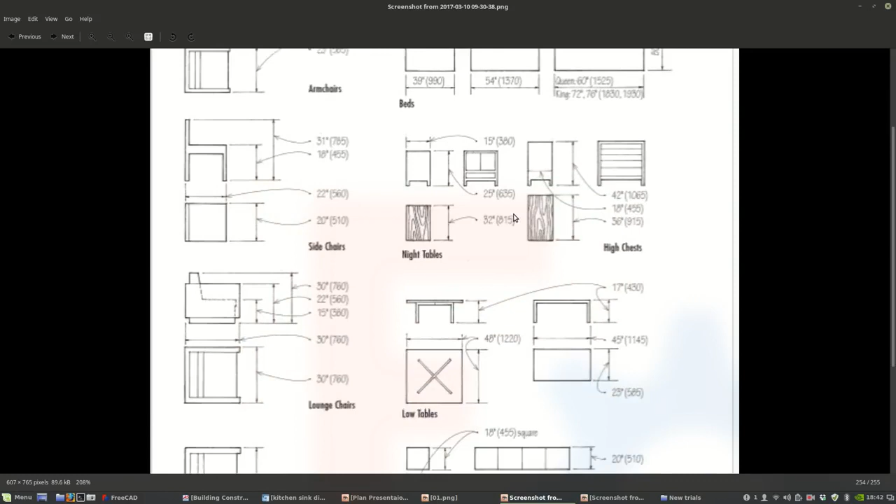A table is an easy one, we can just look up some table dimensions. So a low table dimension probably has a 0.585 dimension by 1145.

So I'm just going to draw that, 0.58 by 1.125, I guess, or maybe 45. Doesn't make a big difference.

And so I come here to transparency 80 and line width 1. Okay, so that's our table, this is a very simple one.

So let's position him with the rest of the objects, put him here with the couch. I'm going to rotate that like this. Alright, and then press shift to lock it into that angle, otherwise it's going to be trying to move around and I want to lock it in that direction. Or I can type 90 degrees here and enter.

So now I can move it. I'm going to move it to the center here, and then give it a gentle foot spacing, probably of 0.2 meters. Oh well, this is already good enough. Okay, so that's our table.

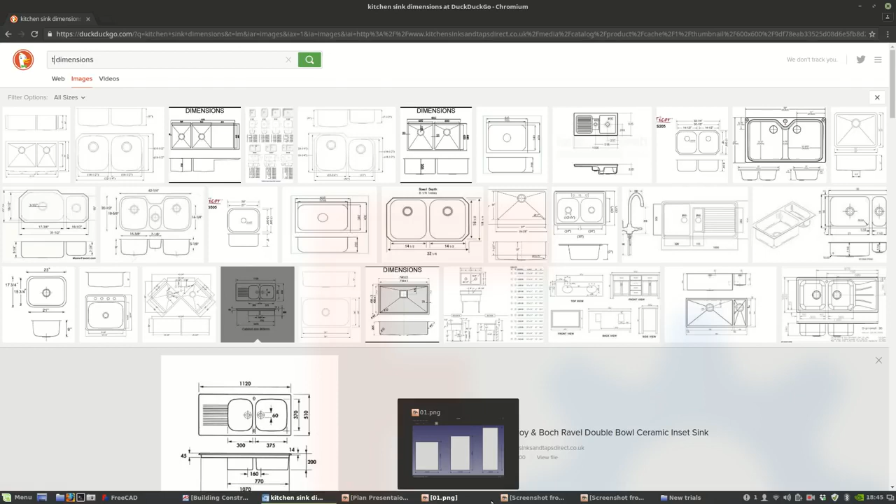So what we're going to do is try to model the toilet. We're going to look for some dimensions. Toilet dimensions, alright, I'm going to look for some good dimensions.

This looks good. This looks pretty good as well, as a modeling exercise. Let me see if there's not any other one that looks better. Let's look at this one. Yeah, fairly simple. But maybe this one, let's look at this one.

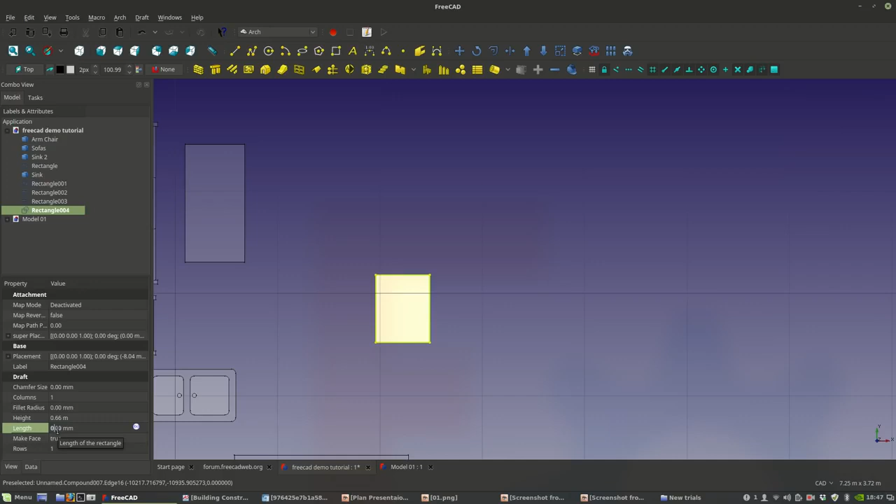I'm going to take the square command, draw that, and set the height. I'm going to say 0.66 right there, and I am going to look at the other one by 360. Okay, so this is 0.36. There you go. Okay, so I'm going to make that false, that's the total size.

And then what else can I have as information? So it seems that everything else seems to be arbitrary, almost to an eye level kind of deal. Alright, so I'm going to select this rectangle and make a copy of it. I'm going to copy and paste it. On the second copy I'm going to change the height, bring it down to maybe, let's look at 5 or 4. Okay, this looks good.

I'm going to select this guy, copy and paste him. And this other guy, I'm going to tell him to be maybe 3 or 10... or let's see, maybe 20. I'm going to move him to the top.

Okay, that looks good. So I'm going to take this rectangle and hide it a little bit. Now I have two objects, so I can take this object and copy that, then paste him.

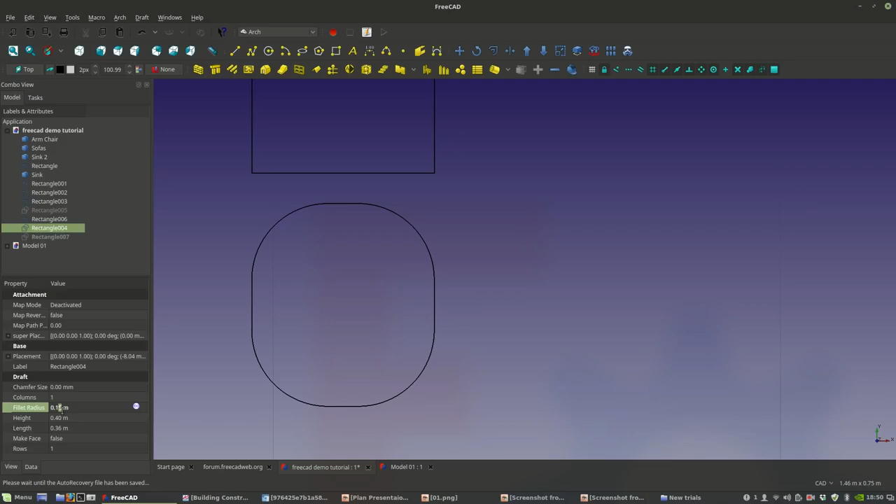Nope, that's not what I was trying to do. Go back to 1. Okay, so let's say 1.5... 1.67. Okay, this is good enough for what we're trying to do. Anything more than that is just going to screw it up. So now we have that.

We want to explode this rectangle, so I'm going to select the rectangle and explode it. You can see it created all these individual edges.

Okay, so I don't want these edges. I'm going to delete this guy, delete this guy, delete this guy, delete this guy, and delete that guy. So now all I'm left with is this.

Okay, looking good. So I'm going to bring back this other guy that I was hiding, and this guy as well. I'm going to explode him, and delete this line.

For this line, I'm going to stretch it till it snaps here. I'll do the same thing with this guy, stretch it till it snaps to the edge of that line, and this is how I get this nice curve.

So now I can select all of this and build it back together into one object. I'll weld it together and then bring it back into a face right there. So that's it, this is our face.

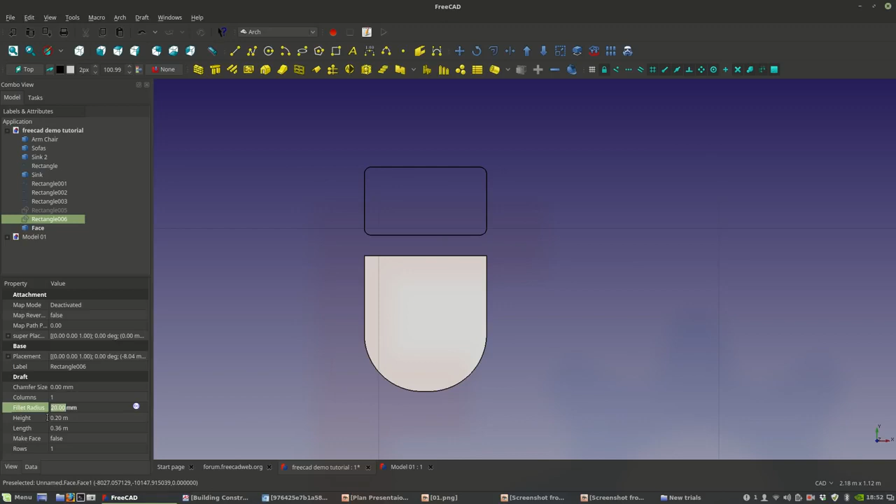So we're going to put it at maybe 20, or let's see, 60. Okay, that looks good, it's good enough for what we're trying to do.

And then make face, of course true, and take these two objects, go to the part, and what we're going to do is part, compound, make compound, and then we have our compound. You can rename it toilet. There you go, it's looking good.

And then go back to the architecture, select that, move a copy of it, and so this is our copy. Change the line width and bring the transparency value to 80, and there you go, we have our toilet looking good. So we can delete that, and delete that.

Okay, now we were missing our bed, I think. So we have a bed here, and then we have a shower, and we have shelving. So you basically get the general idea of how this begins to work.

So I'm going to pause from here and then get the other drawings done pretty quickly so that we can save some time.

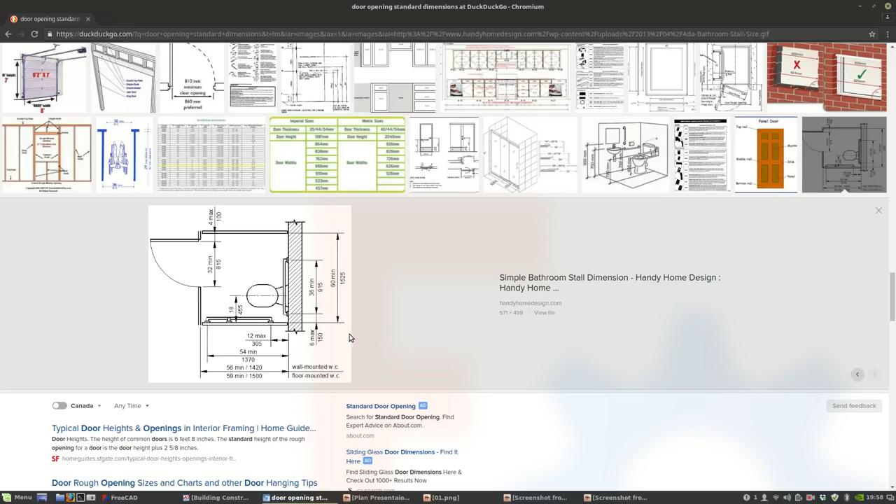So following the modeling of the toilet, I want to show you something. Here's, for example, a view file, an example of a way to position something to have in mind. It gives you a pretty good idea of the placement of the toilet in the bathroom.

It tells you that if you want to meet code requirements and also ergonomic requirements, with this guardrail or handrail, especially for people with wheelchairs, you must offset the toilet by 0.455 meters off the wall. So we're going to try to do that here as well, so that our object meets the requirement.

So I'm just going to draw a little hypothetical box here, and make the box a false face in terms of face. Then I'm going to select this and move it inside, snap right there, and move it on the top end. Okay, so it's telling me that the ADA axis is from the center of the toilet all the way to the edge.

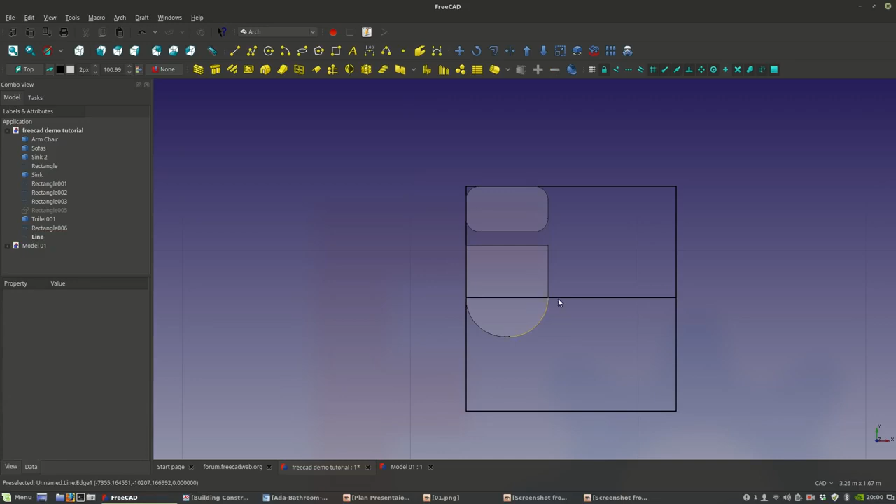So I want to draw 0.45 like that, and 0.45 like that. So I want to just take this and snap it right here. So basically I know that from this center to this center, and so now I can move this up here like that.

So now I can delete that, and I know that I must maintain this edge on the side. So maybe I can draw a box as a reference, go to the architecture draft, move that right there, select this line, grab the mirror tool and draw a line there. So there I know that my object fits well in its place. That's one little detail I wanted to show you.

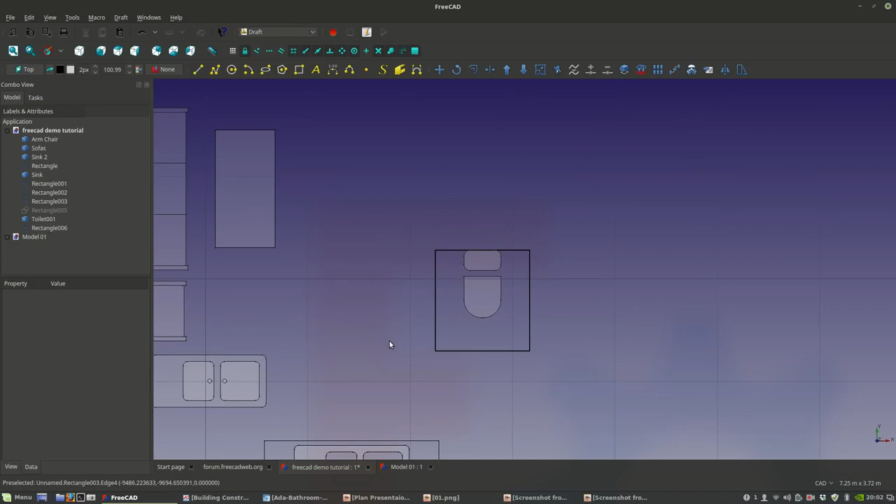So now one thing we didn't model was the door. Let's look at a door here. This is a standard, these are some standard door dimensions. Typically in the US the standard door height is 7 foot, but since we're working in meters, we're going to work with 2.1 meters height. As far as the width, the standard width in America is 3 foot wide, but in meters it's 0.915. We're going to work with that, or maybe we're just going to work with 0.90. That seems to be the standard.

So here, how is that going to work? First I'm going to draw my line here, and I'm going to call it length 0.9. That's my length, 0.9. The next thing I want to do is draw my arc, or maybe draw thickness. Yeah, I want to draw the arc, let's go with the arc first.

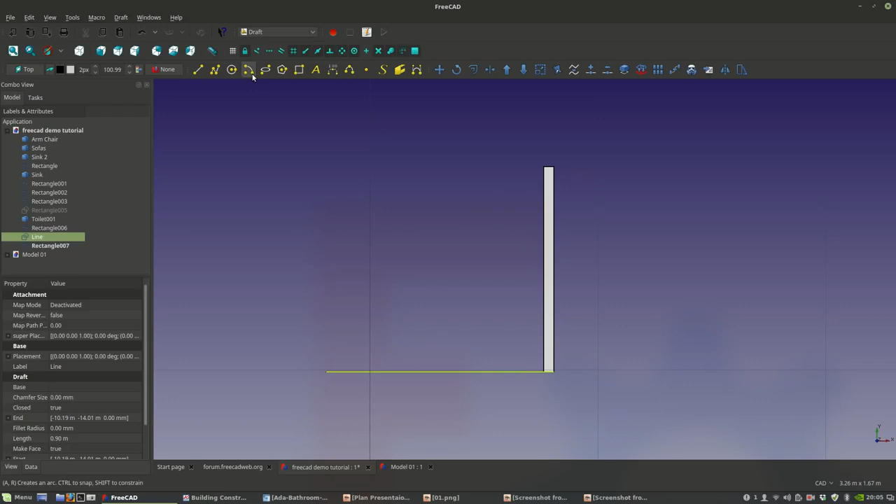So now I want the height of that door to be 0.9. That's it. Now I want to move it, I want to move this edge right here. And how does the door swing go? The door swing goes from this edge to this edge, so it locks down like this. So I want to take the arc and start from right here, snap right here and snap right there, and just draw a line like that. So that's my door, it's looking good.

So now I want to draw the little wood on the side. If I'm assuming that my wall is, let's say 1.5, I'm going to assume that my wall is maybe 0.2 meters thick, like that. I'm first going to create the dimension 0.2. Okay, so now that I got the thickness, I probably want it to be maybe 10 centimeters wide, like this.

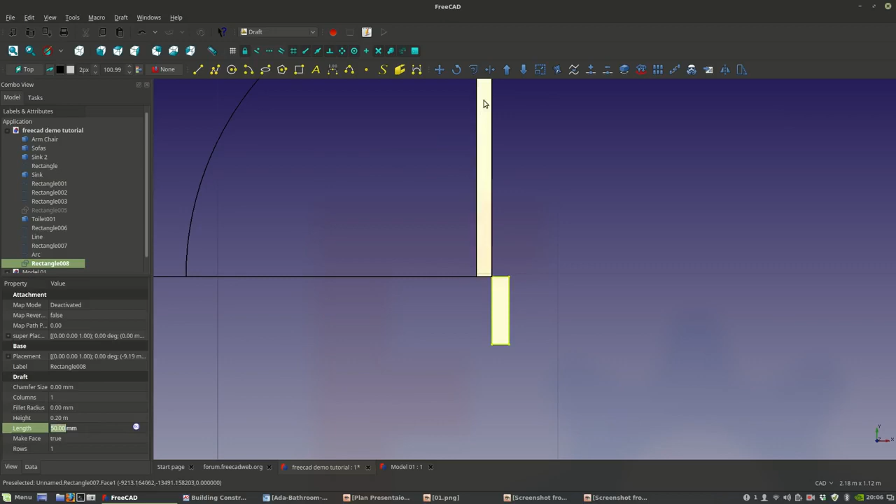So that's my door, and that's everything that's going to allow me to control my door. Now I can select everything and go to the Part workbench.

In this compound, I'm going to make a compound called door, rename it, and type door, 90 cm. Let's actually verify that's actually 90 cm.

So I'm going to go to the architecture. Since I've already exploded this and copied it, it lost its properties, so I'm going to verify the length. Okay, so it's all good.

So that's my door. What I can do as well is create different orientations of the door. I'm going to go to the draft workbench one more time, select the mirror tool, select these two guys, and mirror them right there. This allows me to always have a handy door selection in any kind of orientation.

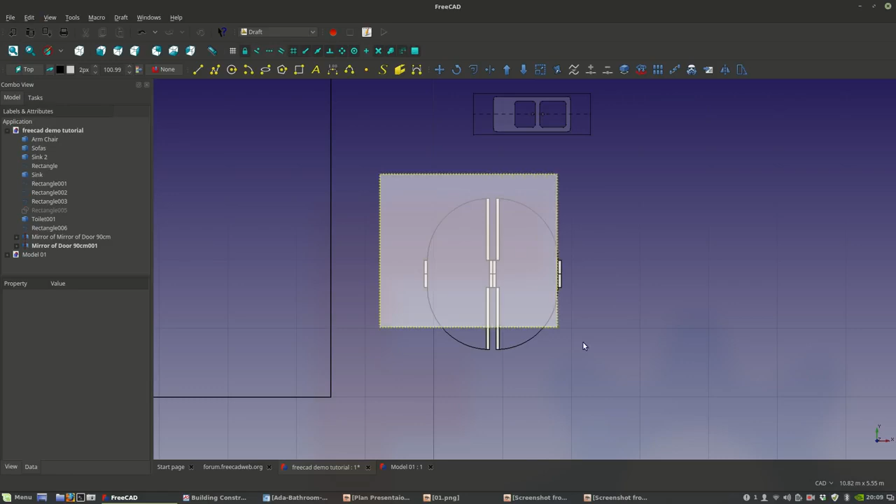And by the way, I'm missing another thing. I have to select this and also copy it on the side like this. Okay, select it one more time, like this, and then rotate my doors by 90 degrees. So then I can always have a way to copy the door in any kind of orientation that I want to.

So that's for the most part the gist of it. We haven't drawn the bed yet. That's a very minute detail, we can always figure that out easily. Let's actually do that real quickly.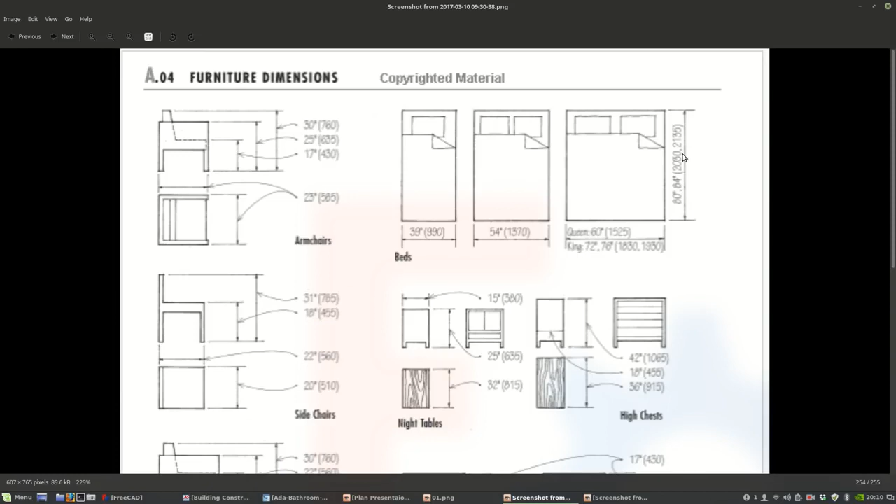So we're going to work with 1370, 1.37. So we're gonna tell it 1.37, and the height - it says anywhere from 80 to 84, so we're going to work with 2135. So 2135 here, 2.135. Okay, so there you go.

So that's our bed. What else? So we can create the pillow, just to create the line. Let's say we can duplicate this line, copy, paste, so I select that line.

I probably reduce the height a little bit, probably go down to 1.8. Maybe that's too short, that's not short enough. Maybe 1.4 - okay, that's better.

Make this a false face, so we're able to select things above it. I'm going to just quickly draw - locate the center here just so I have a reference, a visual reference. And I'm going to draw a pillow case here, give it some decent dimensions, 0.25 by 0.5.

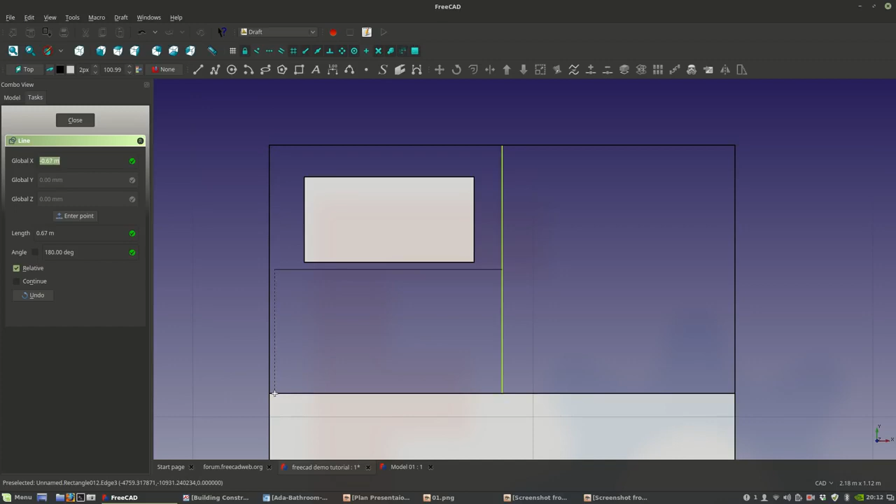Okay, that looks good. So I'm also just going to locate it. I need an extra snap to something here. I'm gonna turn those off, probably turn off the grid.

No, maybe not. Center, I'm gonna turn that off. Turn that off. What is this one? This is the intersection, I might leave that on. Perpendicular, let's see what happens. Still not snapping onto the edge, something is not right. Extension and point, midpoint, perpendicular.

Let's see, ortho - I guess I was missing ortho. Okay, there you go. So I select this guy, select his midpoint, uncheck the copy, and click right there. And also it looks good. So delete that line, select this guy, mirror that onto the other side, and there you go.

And the next thing is probably do the little triangle thing. So I'm going to select this polygon, tell it to have 3 sides, and then I'm just going to draw that right there, that's enough. The radius is enough, so I'm just going to select that.

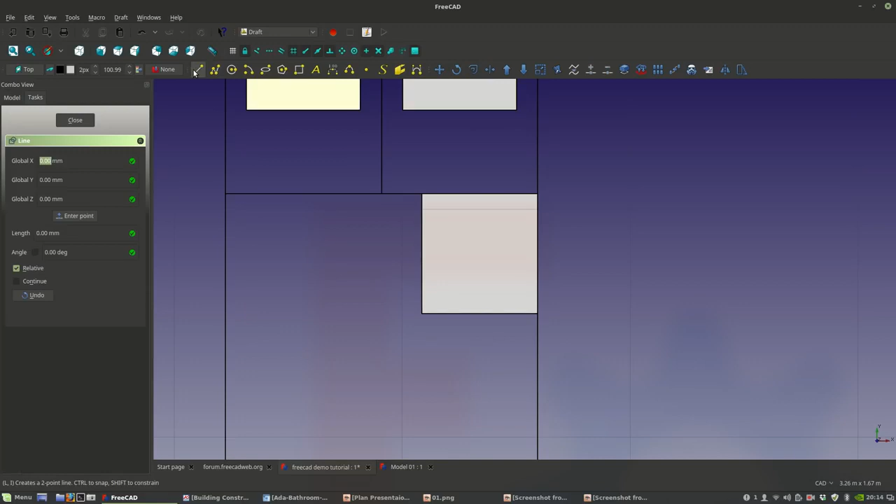So what do I want to do? Let's see. Well, that's not what I had to do. What I had to do was probably draw a box here like this, and probably also make this false, so I can now draw a line here like this, and then I can explode this.

I can delete that actually, and I can just simply draw a polygon here like that. Alright, undo that and just click there, so it's looking good. So I can delete the line, I don't need that anymore, so I have my nice looking polygon.

Can delete that. I can actually increase the size of this guy back maybe to 1.8 again, or no, maybe 1.7 like this, or maybe 1.6, and then take this guy and simply move him up like this. So now everything's looking good.

So bring my shapes back together, make face again true. Okay, and this guy, make face again true. Okay, so that's my bed. So I can select all of those guys.

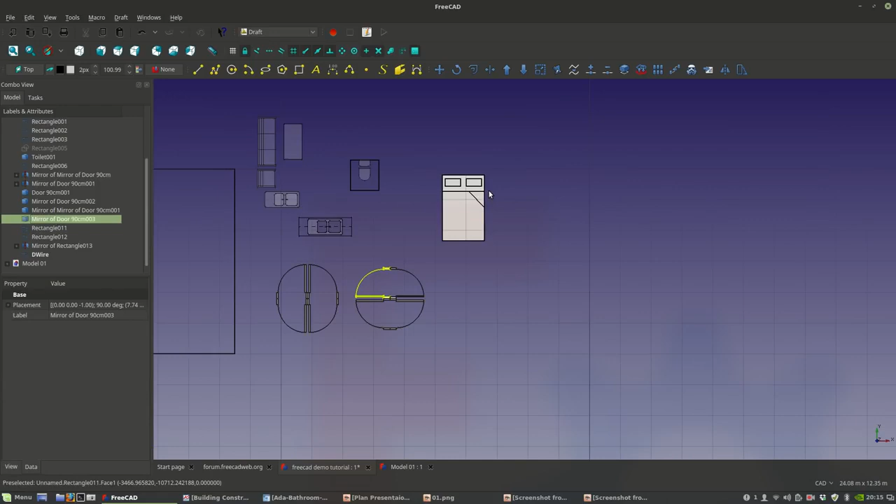Okay, select all those guys, and then make a copy on the side. Obviously this mirror doesn't want to be selected, so I'm gonna select it, and then select that and that, and make a copy on the side. Okay, so it's lost all of its memory.

So what we're gonna do now is convert that into, let's go to part workbench, part compound, make compound. So now we have a nice compound, so we're gonna call it, rename, we're gonna call it bed. Simple. So now that we have bed, we can simplify that, we can copy that again one more time, copy that, so now everything just looks at one piece.

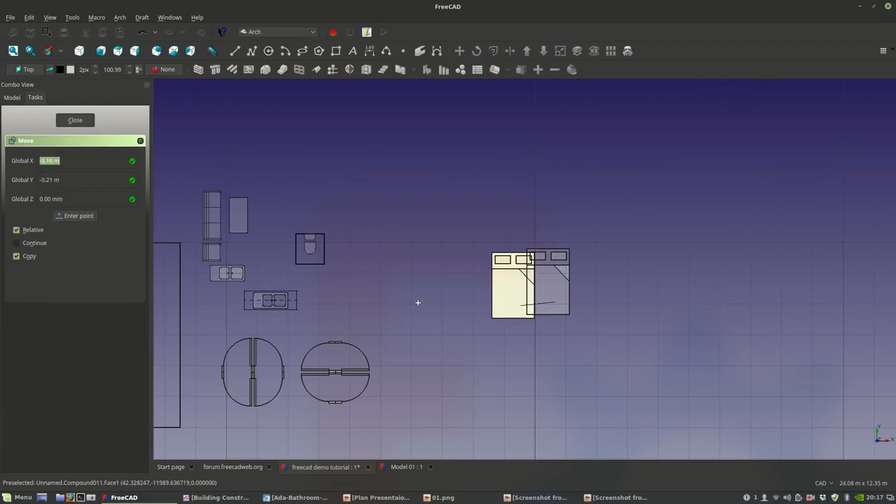And so now we can control the transparency value as well pretty easily. Okay, so now I can delete this, delete that. Okay, so now everything's deleted, so now we have a nice looking bed, so we can move him around. Let's put him next to the other furnitures, uncheck the copy, move him right here, bring down the line width to 1, and everything looks good.

As for the bathroom sink, we can simply do a quick simple one. Let's see here, let's use this dimension as a reference. I don't remember exactly what it was. I'm gonna get these dimensions, 0.3 wide by 0.38 wide.

So I am going to just draw 0.3 by 0.38. Looking good. So I am going to give it some kind of fillet radius, probably 10, too small, 30 mm, okay, so 30, like so. Does it look good? Maybe increase that a little bit more, 50. Yeah, well, we're gonna work with this.

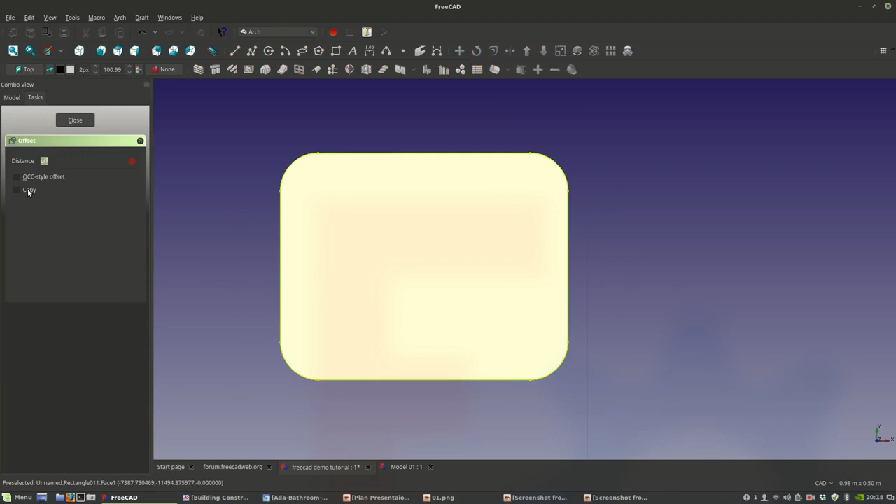So I'm going to offset that a little bit. I'm going to make a copy and then offset that by maybe 12 millimeters. There you go. And the next thing is probably draw a hole, make face false, true, okay, false,

and then I'm just gonna draw a small hole on that center right there. Not that, close that, select the circle, and I'm going to select, cancel. I'm gonna select the nearest and the snap. How did you get all the way there? Okay, so I'm gonna select this nearest when I draw. So I'm gonna select that. So you see it snaps everywhere. So I'm gonna select the nearest, so it allows me to draw anywhere.

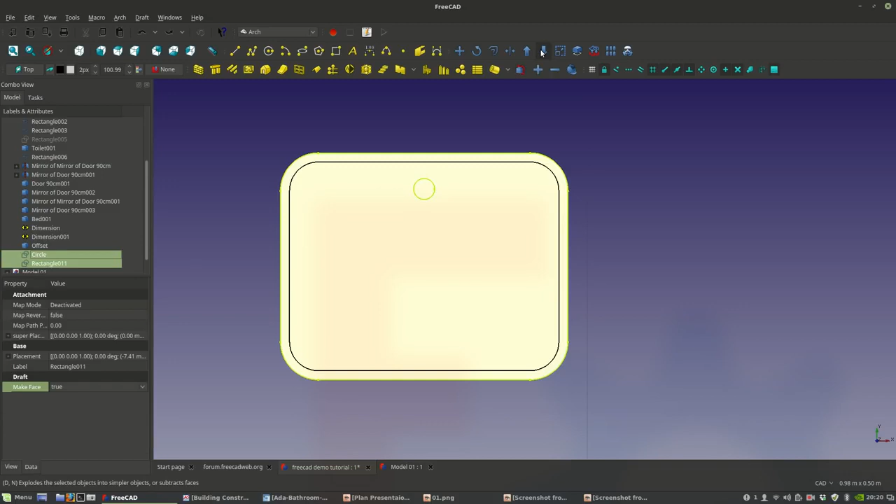So I'm just gonna do that. Perfect. Alright, now I can delete this. I don't need that anymore. Okay, so true. And so I'm going to select that, and that, and that. And I, oops, I made a mistake of selection. So I select the large guy, and then shift select the small guy, and then I press the downgrade button, and it creates my nice hole, and that's my bathroom sink.

And so now I can just copy these two objects and simplify them. Copy that to the side, simplify that. So I have my two objects, and I can go to the part design and make it compound as well. Rename bath sink. Okay, so there you go.

So I can simplify that again, architecture, and copy that. Okay, so I can delete this, delete this, delete that. I have one object there. I can delete this, delete that, delete this, and delete this. And I don't need these two dimensions anymore, so I'm gonna delete them as well. Okay, so I can just rename that so it looks a little bit clean.

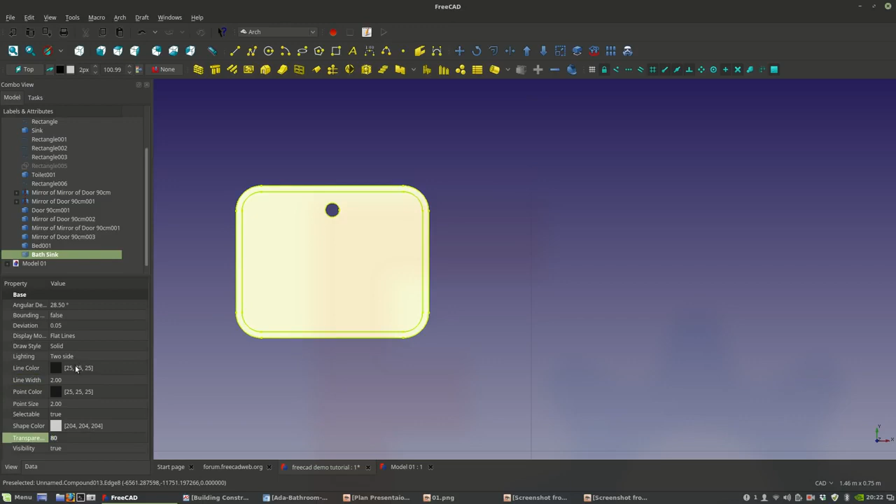Okay, so I can also put its transparency to 80 and change the line width back to 1, and I want it to look like that, so everything is looking clean. So now I more or less have some of my assets. The only thing now that I think I'm missing is probably the

bathroom shower. So once again we're gonna come here and type in bathroom shower dimensions, well, I'm gonna say shower stall dimension. Okay, so I have a few ones here. It's giving me this one right here. Let me see if I can view that file.

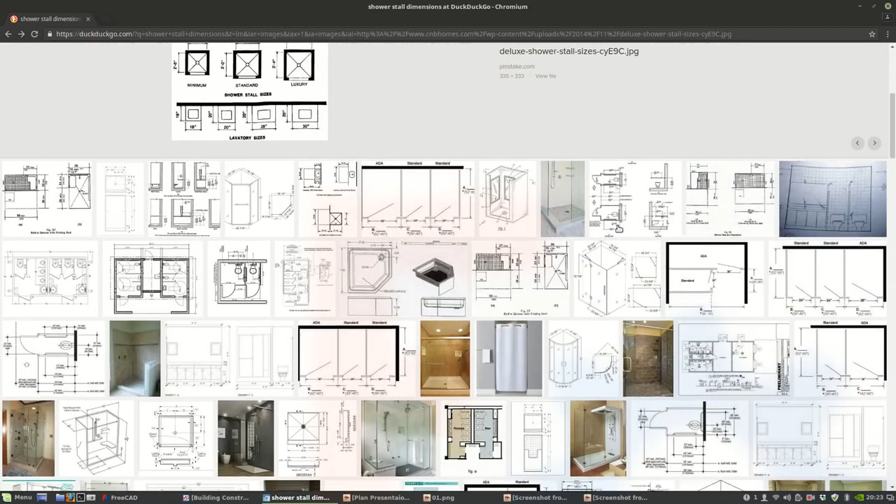Okay, so this is in inches. I want something in meters. Otherwise, that would have been a good one. This one as well as in inches. I mean, I could actually convert these values and get them in meters, but I just wanted to pick something directly because this is a basic tutorial. I don't want to get into doing a lot of complex calculations and conversions for no reason. So I'm looking for a good one, metric. So maybe I should specify that I want it to be metric.

No, that's still in. Let's see what this one is. Okay, so you have a good one here. Actually, it tells you—so it gives you a few options. It tells you that this width here is 0.9 meters by 0.9 meters wide.

So that's all we need to know. I could have easily measured all the things that I did, but I just wanted to show you once again. So I'm gonna draw that—just draw my box there and tell it to be 0.9 by 0.9.

As simple as that. I can probably go to make face, make false, just so I can work in and out of it. I can select that and I'm going to offset a copy inside by a very tiny margin, maybe 30 millimeters sounds good.

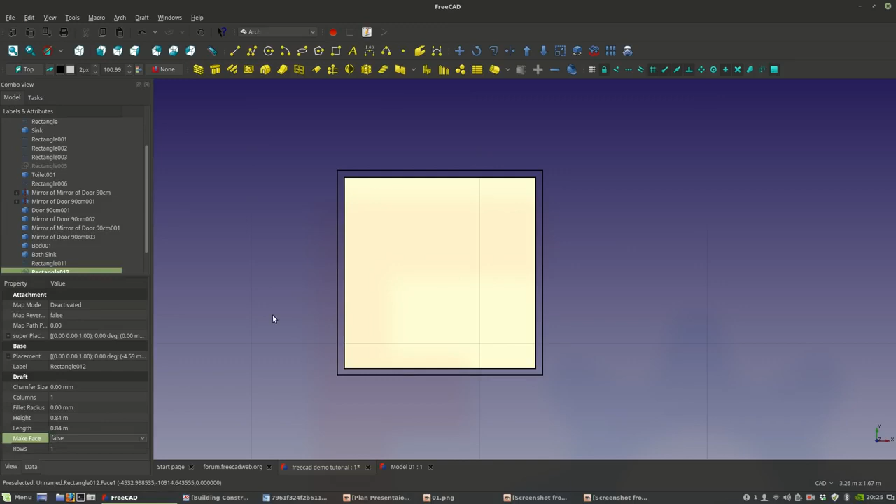Make this guy false again, and all I have to do now is probably draw a line and another line. Now I'm not gonna put the whole direction of the drain, because it allows me to just model in any direction and place it where I want without worrying where the hole is gonna be placed.

So this I am going to bring back those other faces, true and true, and all of them I'm going to combine them once again.

As you can see, we're moving back and forth between the architecture and draft workbench quite often. Some of these tools are interchangeable, so it's just that Yorik has converted some of the part tools into the architecture tools, but some of these tools are the same thing if you know exactly what they do.

So I'm going to copy that again, move that on the side to make a simple copy, and I'm going to rename that. I'm going to call it shower. It's very simple, and then move that on the side again, and it's a simple copy.

So actually I didn't need to move that twice, so I'm gonna delete the original version which has all the initial drawings. Delete that, and delete this line.

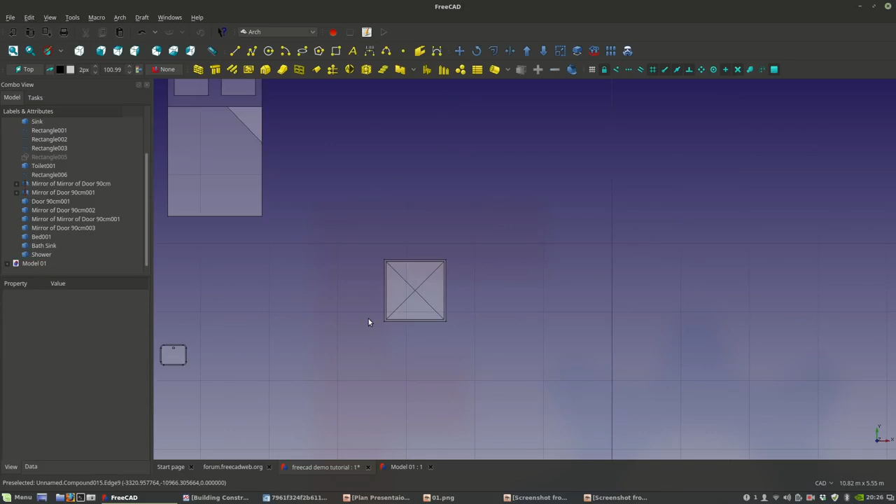So now I have this guy, and I will play with its transparency value 80. See, it's looking good, and I am going to also change this line width to 1. So now we are almost ready to play with some stuff here.

So I'm gonna put him right here. That was a copy. Delete it. Move that. Uncheck that and move that right here. So there you go. So this is what our assets would look like.

So now I just have to make everything look a little bit cleaner. So right here I'm gonna delete that—that's unnecessary. So I'm gonna right click here and I am going to create a group.

Right? So it brings this new folder down here. I'm gonna rename that. I'm gonna call it assets. Okay, so every asset that I have here I'm gonna put it in there. So I'm gonna put that there, everything.

And basically all these doors. Okay, bingo. So now I'm left with just the basic other shape. So if I hide these assets, these other doors are not in there.

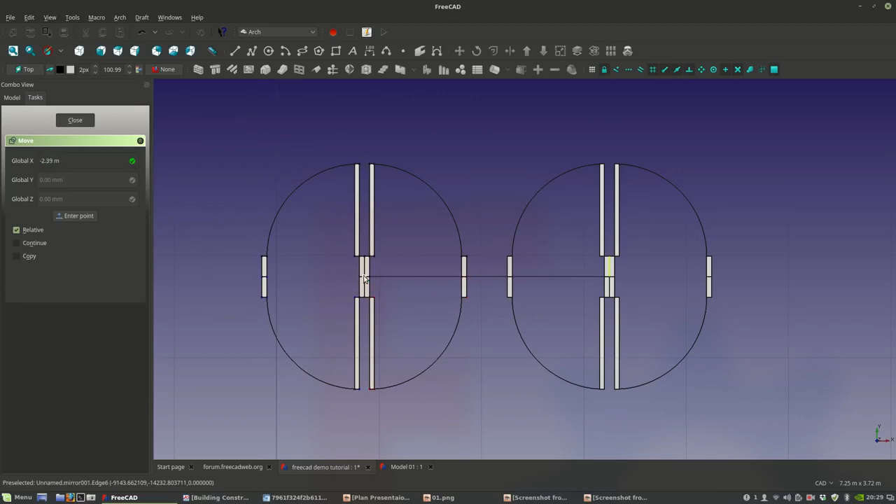So I'm gonna uncheck the copy and simply move them back. Alright, and then here I'm gonna delete the initial guys. So this guy, so this guy as well. Right click, delete. Okay, so now we've got this guy.

So I'm gonna put them back in the folder assets, drag it and drop it there. So now we're good. So now we have our assets looking good.

Maybe I want these doors to be also a bit transparent, and also to have a line width of 1. Okay, there you go.

So in the next part of this, I'm going to start showing you how you can start to play around. I hope that this was pretty helpful. It was a pretty lengthy tutorial. I wasn't expecting it to be so long, but in the next part I'm going to show you how to start playing around and to place them, but you can already go ahead and start doing that yourself.